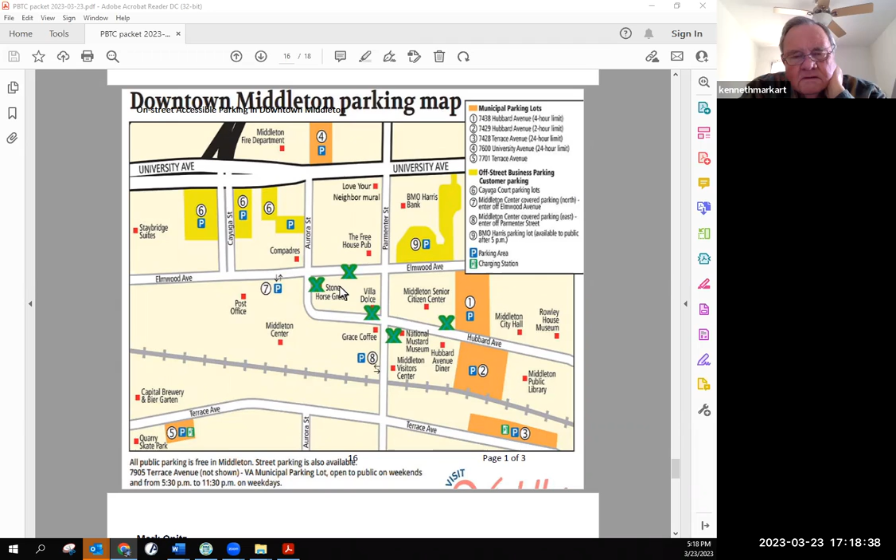Isn't there a couple of angled parking spots in front of the bank there? Right, maybe something could be done there - there's three or four spots. I'm not sure, but it would take two of those spots to do a handicap, wouldn't it? Tammy, you know better. I believe so. I don't know what the dimensions are. Or you could do two spots and have a shared exit area. I'm not sure how it all goes - I haven't had enough time to really look into it.

My personal opinion is it would be better to do it on street, because then you don't have to worry about it being wider. I think you save space and save parking by keeping handicap on street. My concern too is if they have an event where they close down this leg of Hubbard, then those spots wouldn't be available.

May I make a couple remarks? I think I would be remiss if I didn't pass along the comments from the Public Works Director, the city engineer, which I mentioned in the packet. It took me a while to understand this, but I wanted to summarize it.

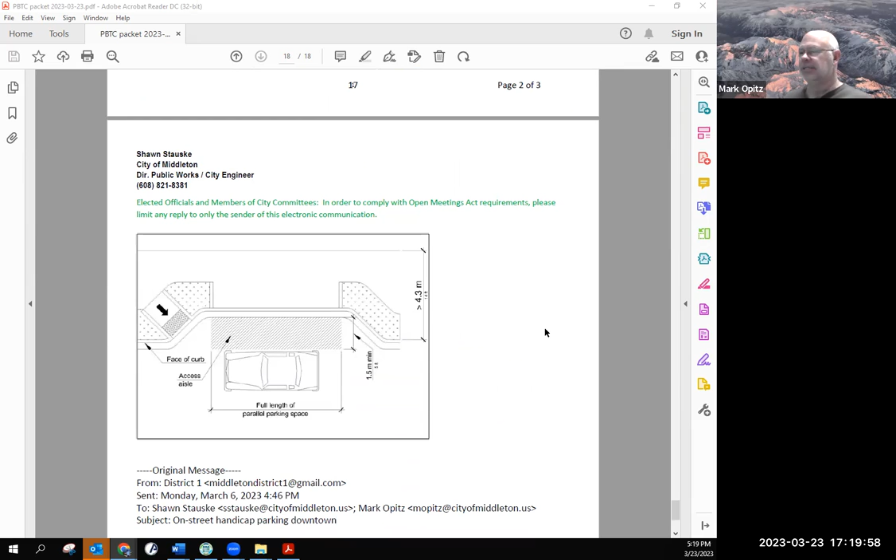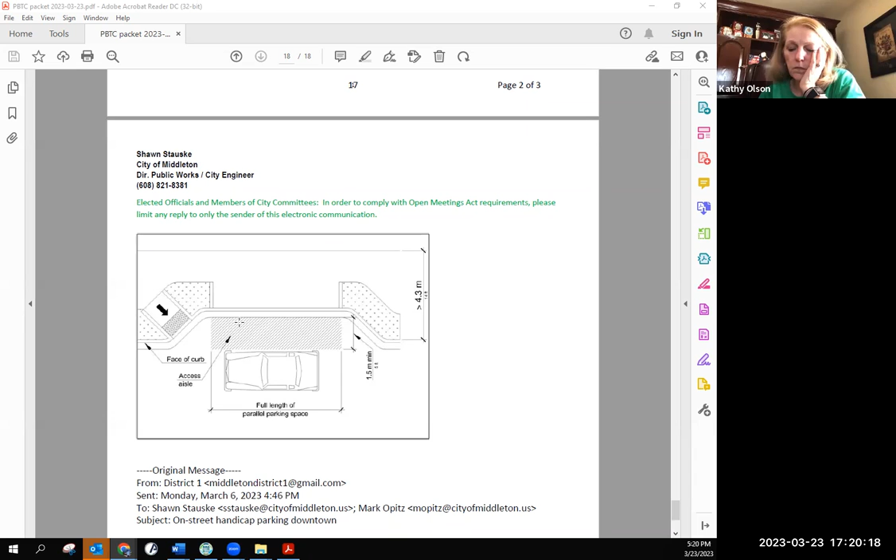In order to have a properly designed handicap spot or accessible spot, there needs to be a level surface on each side of the vehicle. Imagine Costco or Walgreens, or wherever you'd imagine a surface lot, and think about how there's always empty space on each side of the car. The purpose is to provide a level surface in case somebody wishes to access or exit from the driver's side or the passenger side.

This drawing shows that concept on street. The reason it bumps out is because if a vehicle is parked directly next to the curb, there might be 2 inches, might be a foot, however close someone parked to the curb, it creates a gap. So Shawn's observation—I'm not saying he's opposed to this concept, but his concern is simply pointing out that the standards are to have a flat space that doesn't have a big cross slope like you also have on a street terrace.

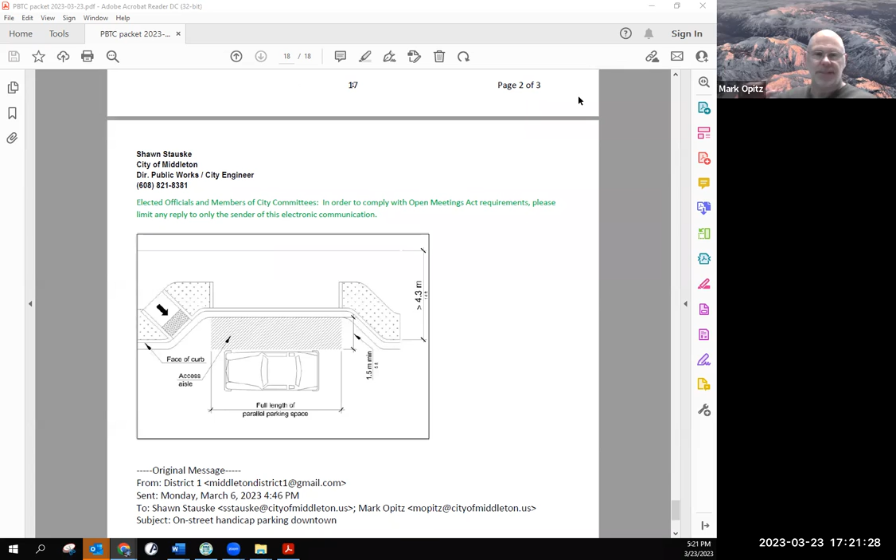That said, there's the phrase, don't let the perfect be the enemy of the good. He and I talked about this because I support adding handicap parking spaces on street downtown. I figure people who need a flat space can make that determination if that's more important to them, as opposed to the many people who can get by with stepping out onto a curb. So I think this has a lot of merit to look at options here that are on the street—they just might not be designatable as fully accessible handicap spaces.

So he and I talked about the idea of a sign, finding some sort of authorized sign that conveys preferential parking for people with limited mobility. Ideally we could use the handicap sign, but maybe somehow conveying—like you see at Walmart or certain places—reserved for seniors, or I've seen them for pregnant women. There's different signs out there, and we could find one that conveys to the public that these are reserved for people with limited mobility.

So I just wanted to pass along the design issues that he cited. There isn't necessarily a standard for this. He just wanted you to be aware of that.

The second observation I want to make is that we have an issue with loading, with truck deliveries that sometimes—Tammy, you've seen this I'm sure with Grape Water and Louisianne's—the vehicles will sometimes park in the street and block a travel lane because they don't have any other way to access the business in close proximity. So I have wondered whether there's a way to have a shared loading zone, available only in the morning until noon or 11, and then have that be shared with accessible parking—finding a way to meet dual purposes.

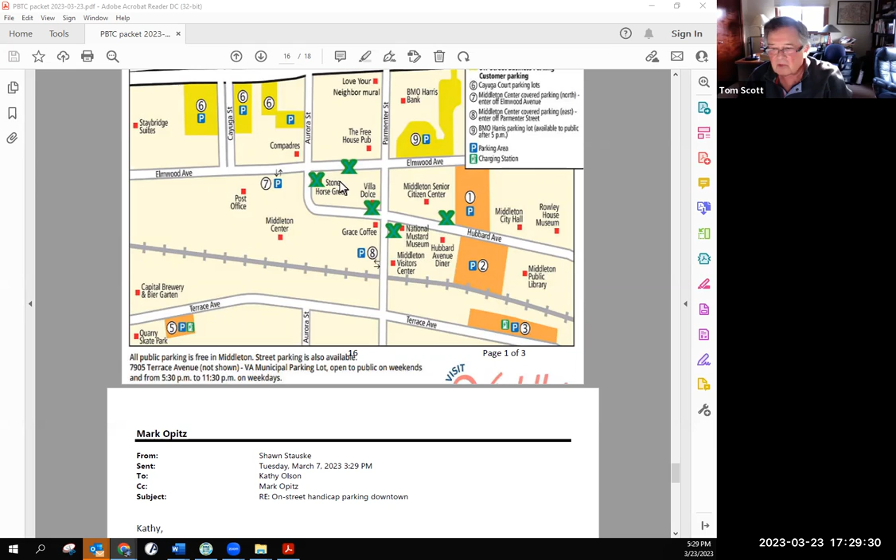I'm looking at Sister Bay right now.

Mark, that's some information you can take to Shawn, and Shawn, you can take a look at that and see what we can do.

Well, if you can think of other examples, let me know. I'm happy to. The nice thing about Google is you don't have to drive somewhere, you can just look at it.

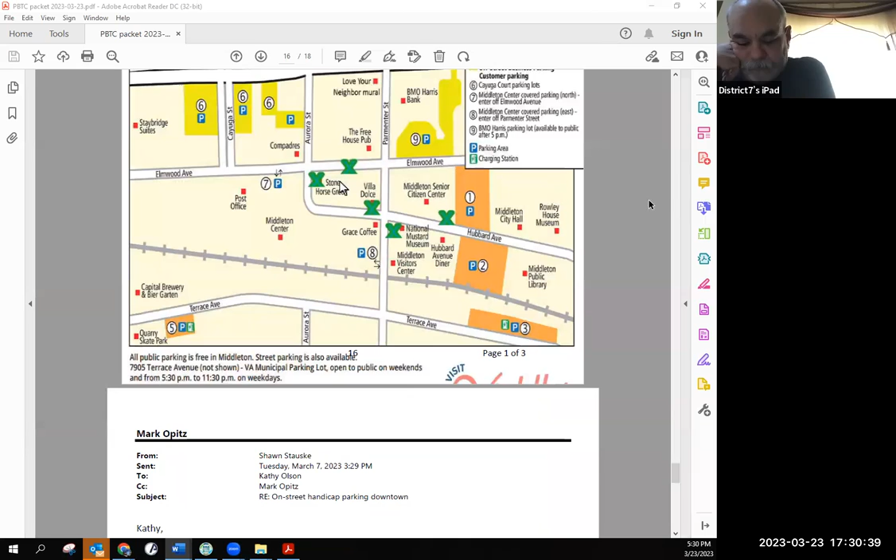So, okay, all right, very good. You need anything more on that, Mark? Or are you good? No, that was a very helpful discussion, and I'm happy to do some research for the next meeting. All right, very good, thank you.

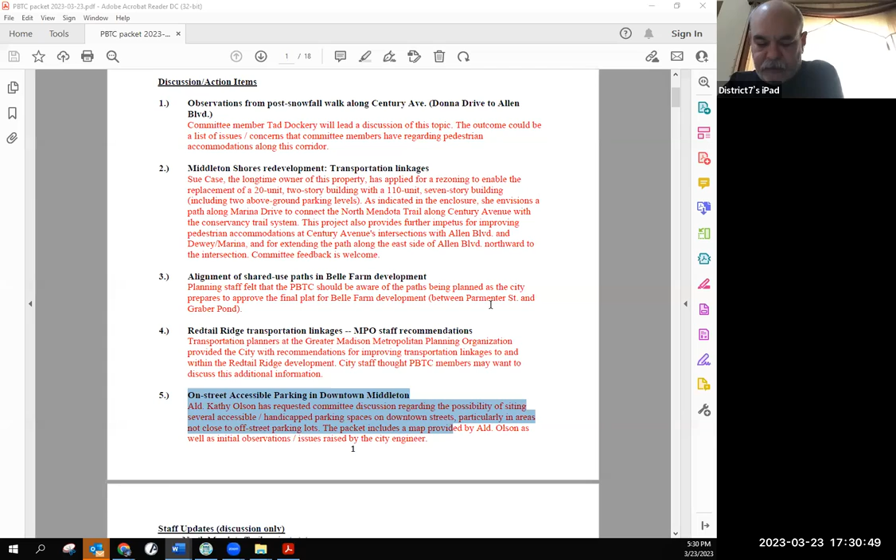All right, let's move on. We'll go to the next agenda item, observations from the post-snowfall walk. Tad, I think this is yours.

Yeah, all right, so let's see, who did we have attending? We had me, Mark, and Katie, and George Zentz was also there. We met at the corner of Century and Donna, right next to the UW Credit Union branch.

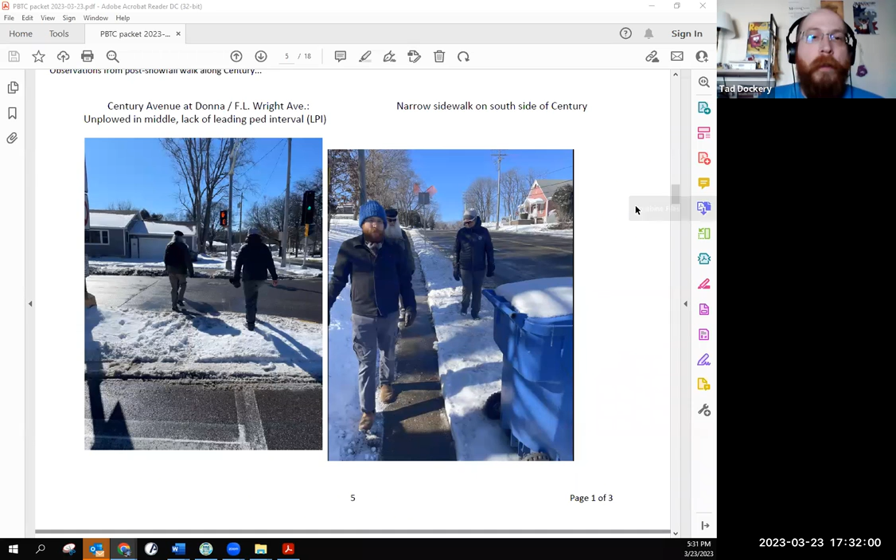Sidewalks are narrow. Shoveling is often only partially done along that particular stretch, or not done at all, leaving it very narrow. You can see the trash cans are still out—that's actually not a big deal, I don't know why I bothered.

Let's scroll down. Well, one comment I do want to make: George noted on the walk that on that side he would not normally walk that direction, because we were walking away from the traffic coming up from behind us. I think this is an interesting observation, but there's a lot of intuitive sense to it, though it's not a luxury residents on the south side of the street have.

Because there are no mid-block crossings, the bus stop in front of the Kwik Trip is partly blocked. It was cleared, but then the plows came by and kicked the snow back up. This is a common feature along the entire length of Century. However, the clearing and the plowing that's done are not coordinated.

The Allen-Century intersection—yes, everyone's favorite intersection. There's standing water in the ramps. This was hardly unique to this intersection, but it's especially prominent there. The markings are faded, and it's a three-stage crossing that takes a very long time.

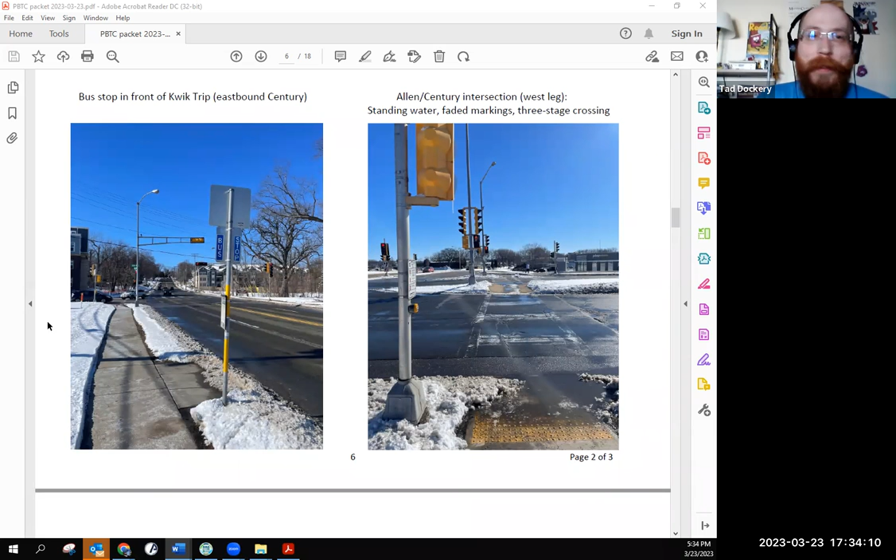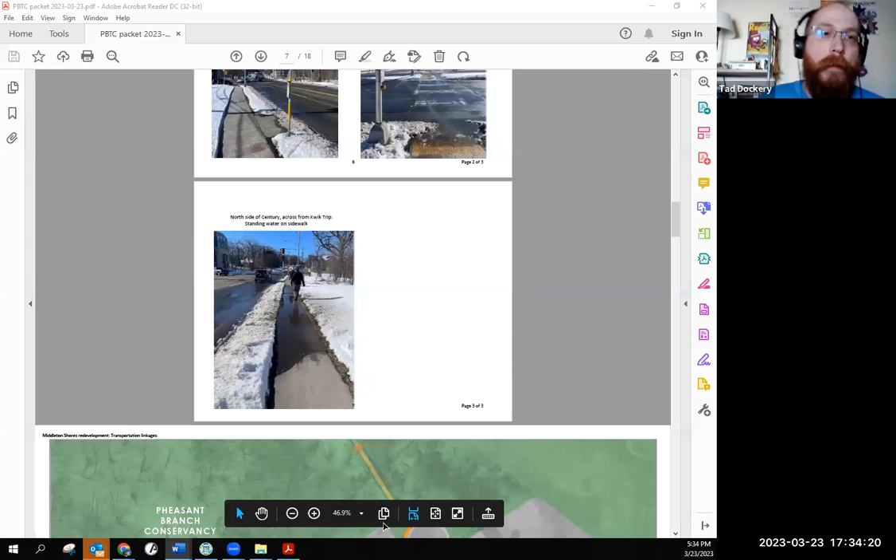Keep scrolling. Once we reached that intersection and crossed the street, we headed back north, heading west again on the north side of the street. This is across from the Kwik Trip—you'll notice the standing water on the sidewalk. This is a feature of winter because snow piles up on the terrace and lawns, and all the meltwater in flat or dipped areas just collects there.

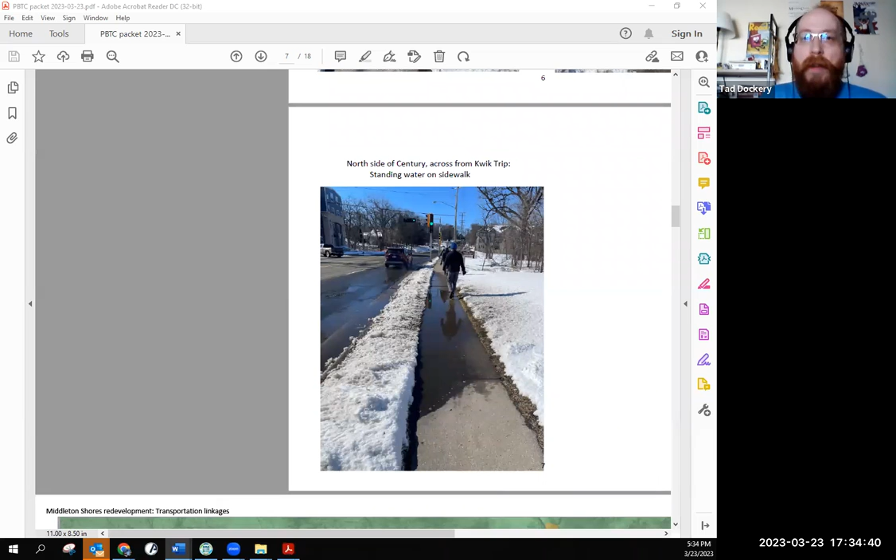Back up closer to where we began, where that narrow sidewalk is, that stretch is actually particularly treacherous because of this effect. The water will melt, run down during the day, and then freeze at night, so you have sheets of ice on a sloped sidewalk. That's just that one little stretch of Century after a snowfall.

Other questions? Comments? Did you mention the LPI at Frank Lloyd Wright, the delayed time? No, I didn't, that's correct. When we pressed the button to cross the street at Century, we were the only people there. We pressed the button, and a car arrived several seconds after and got the green arrow ahead of us. This is the thing I have been complaining about for a year and a half now.

Yep, and we did also test the LPI down at the crossing of Century for the Conservancy, just to see it in action. And we noted the significant difference.

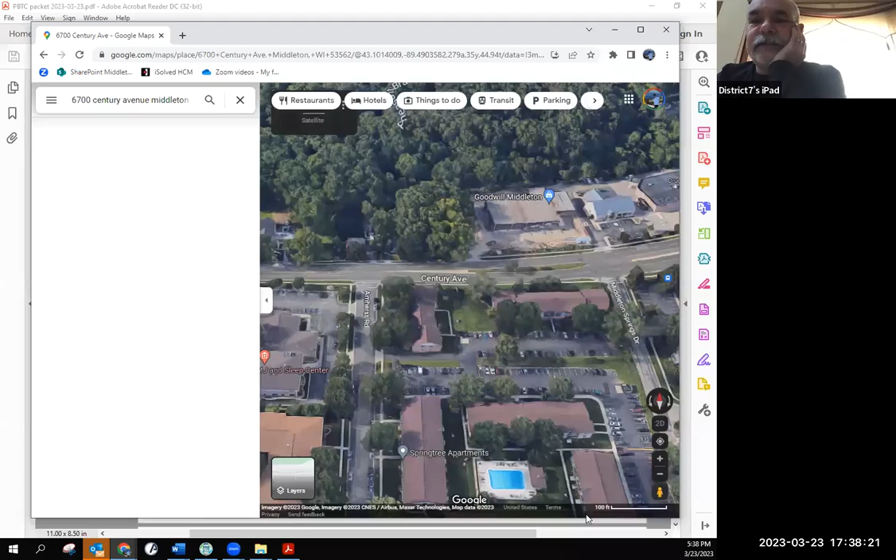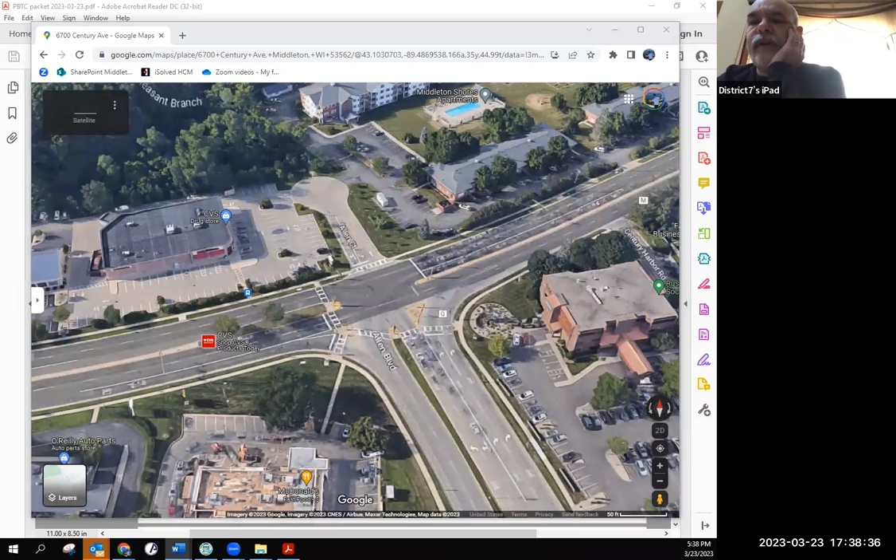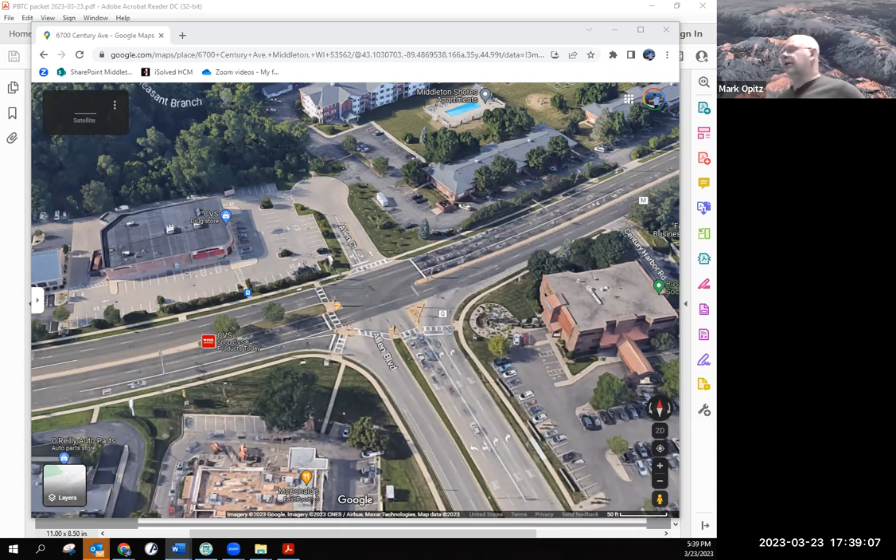One of the things this committee is going to become more involved in - Mark and Sean Elsrud are going to be working together on this - is getting more involved with the 5-year streets plan. In our last 5-year streets plan that the Public Works Committee just looked at a week or two ago, we looked at, Mark, was it 2026? The county was looking at resurfacing Century Avenue, and as part of that, the Public Works Committee put forward a motion to put some money in the 2025 budget to redesign the intersection at Century and Allen, because as we've all discussed, it's a terrible intersection. So the opportunity to do something with that, and for this committee to have input, is coming down the pike - we'll have much more say in what's going on.

And some of the things you showed in your pictures, Tad, I'm just not sure there's really anything that can be done. It's the nature of where we live - I don't know how you tackle standing water or freezing and refreezing. Some of those things are just the nature of where we live.

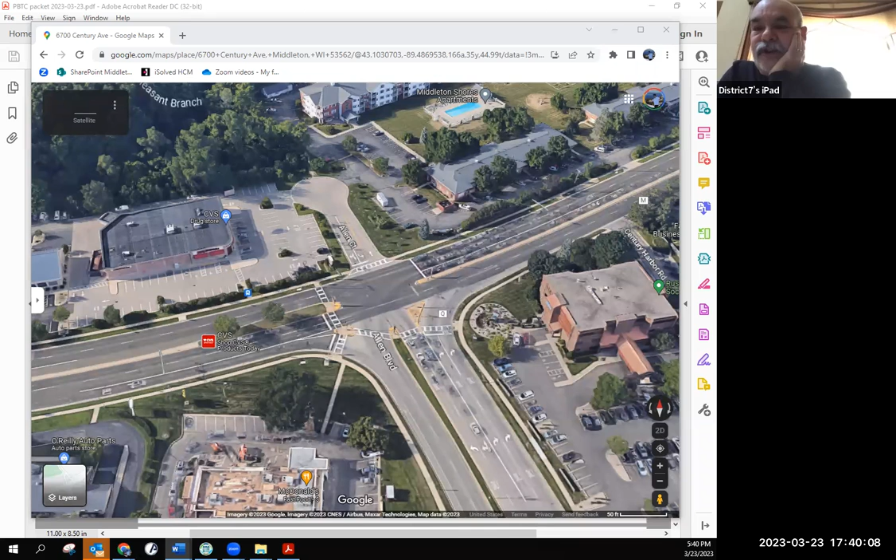Yeah, some of it - a big part of it along here is narrow sidewalks. The sidewalks are only 3 feet wide as designed, and due to lawn encroachment, they're frequently narrower even in summer. That means snow collects very close. Where we were walking on that narrow sidewalk, it was that narrow because the people there do not shovel the entire sidewalk. Nobody ever complains to the city, so it never gets done.

I have now used the snow complaint system on the website exactly once. It's a pretty frustrating system to use - I have to log in, find the form, and because of that, I'm not going to do it. I'm not going to take my gloves off and log into the system on my smartphone out on the street and stand there filling out the form. So I have to remember to do it when I get home. A lot of people don't care because they drive everywhere, so it doesn't bother them.

So the narrowness of the sidewalk plays a huge role, because I also walk through part of the Parkside Heights neighborhood along Donna Drive. When I'm walking along Donna Drive and then south to University during the winter, I walk on the sidewalks only as far as Meadowbrook, then I dodge off to Meadowbrook and Brookdale to cut the corner. Those places do not have any sidewalks, just a street. As a result, the street gets plowed, it's nice and flat, dry and easy to walk on, and there's almost never any cars.

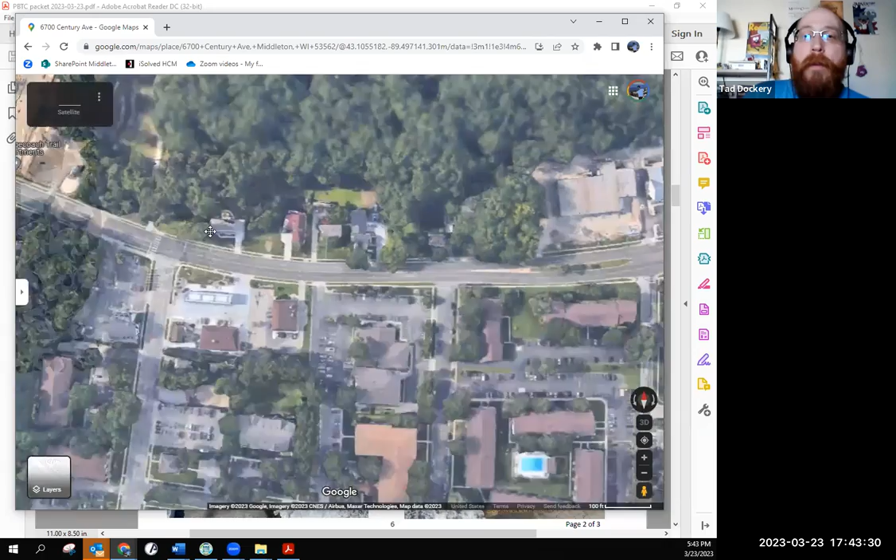Likewise, another big place that the water pools is at the curbs. So when we crossed Amherst Road, there was a significant amount of water pooled in the curb cuts, but Amherst Road is completely flat. The reason the water pooled there instead of draining away is partly because of the snow, but mostly because the curbs are designed in such a way that the snowplows push these snow dams right up into the gutter. The water pools into the gutter, so there's no water standing on the crosswalk, only on the entries.

One of the reasons I brought up continuous sidewalks way back when we were talking about Elmwood and Park is because continuous sidewalks drain the water off into the street, creating a drier walking environment. Now we'd have to figure out what that means for snowplows. I know the UW manages to do it at several locations, so I know it's doable.

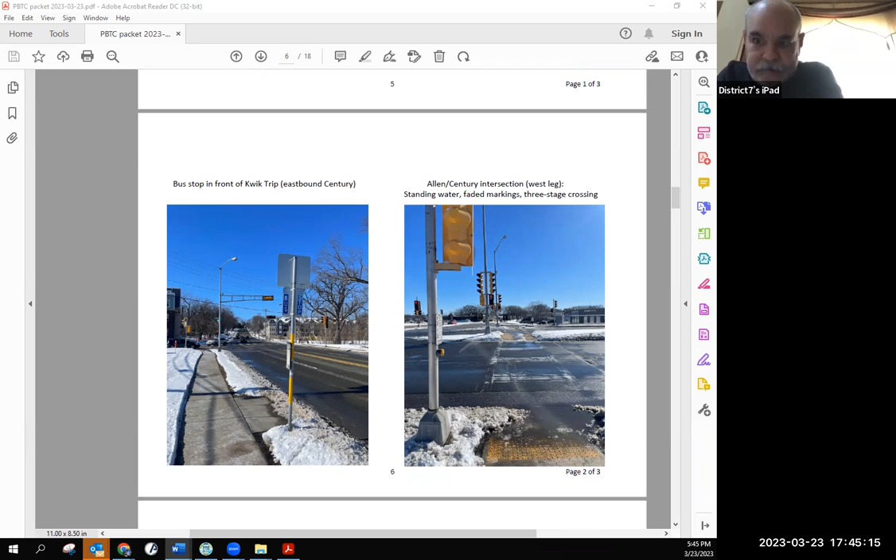Sorry, I could ramble on, but no. Well, and again, I understand some of the issues you're talking about. I also know from a practical standpoint that these issues are most generally dealt with when we redo a street. We're going to have an opportunity to weigh in and have some input on what Century and Allen is going to look like.

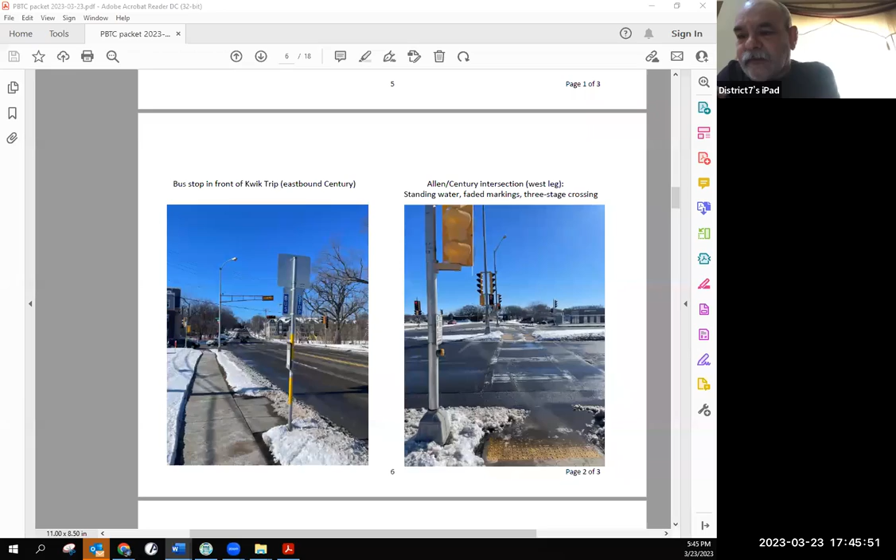And kind of that entire length to a certain extent. We're redoing Century, but we're not going to tear out all the sidewalks and start over. That's just not in anybody's budget, not in any world. But incrementally, we can at least change some things. It's all got to be in from a financial standpoint, and that's just the way of the world. It's got to be done in conjunction with another project.

It's good to be talking about it now, because otherwise we'll continue doing the same things we've always done. Which is why it's very important that this committee - and it's only been within the last year that this committee will take a more active role - I pushed for a more active role in the 5-year street plan, so Bike and Ped will actually have more input into making some of these changes and helping it become more pedestrian safe.

So, while we're not going to solve all the problems, there is opportunity for us to start having some actual input into some of these solutions of these problems you're talking about, which I think is a good thing. So we'll count on you, Tad, to kind of push the envelope a little bit as you do. So you're our resident envelope pusher.

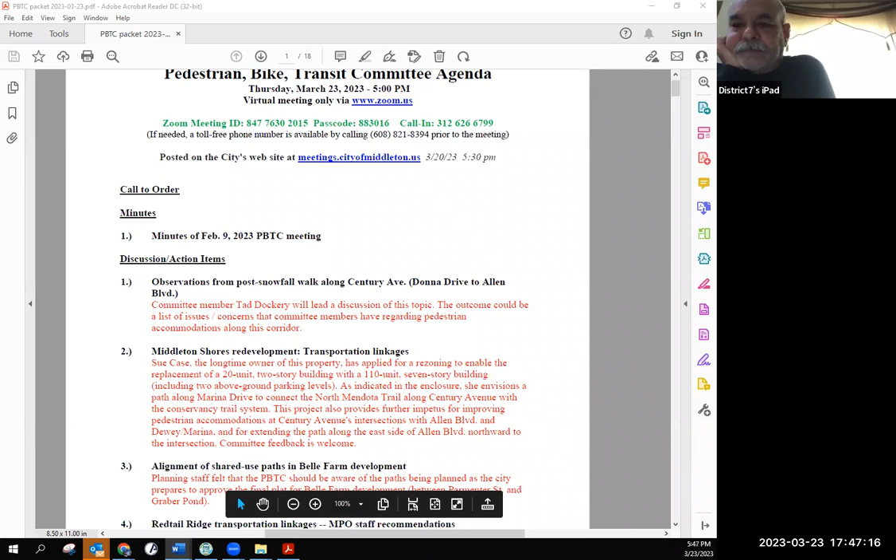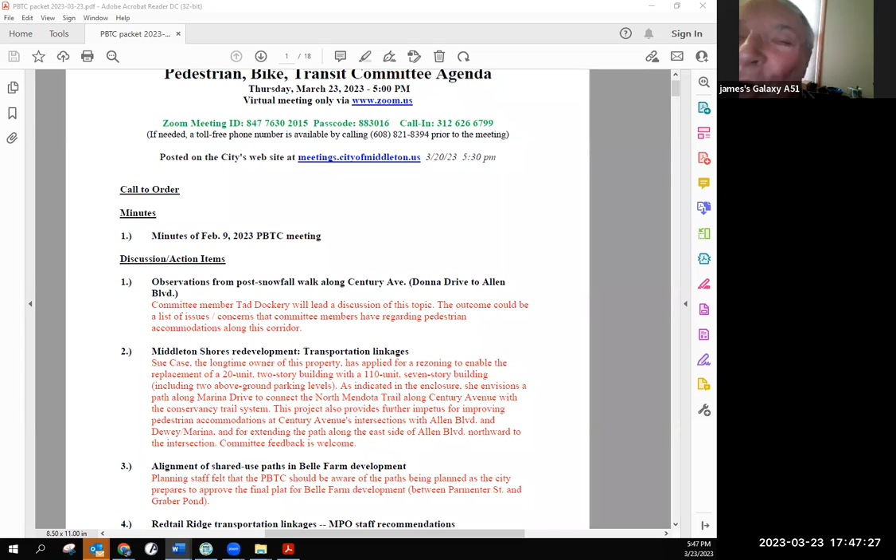All right, does anybody have any comments to Tad's presentation? I wanted to bring up one thing - this is Jim. Yep, thanks Jim, go ahead. Sorry, my computer got hacked and I'm speaking on the phone.

As far as the mid-street refuge, who's responsible for clearing those? Because I'm very familiar with the one on North Avenue and Park Lawn, and you can be a week and a half after a snowstorm, and you go across the street, you have to go around that because it still has snow on there and never gets cleared. So I'm just wondering, because oftentimes on the committee we will mention those as a benefit to pedestrians, and I definitely think they are, 8 months out of the year. But just wondering who is responsible for clearing that?

I would say the answer to that is us, because it's within the right of way. We expect homeowners who live on corners to clear the ramps, but I'm not aware of any homeowner that then goes into the street where we have these pedestrian refuge islands. I didn't even have to go to that one you referred to, because we had one in the packet, as Tad noted - so that's a very good point. I'll pass that along to our public works staff as a reminder for next year to make sure we take care of that. Given that the focus is on plowing, sometimes when plows do a second pass, they come back up and cover what people have removed. Few people want to do something twice.

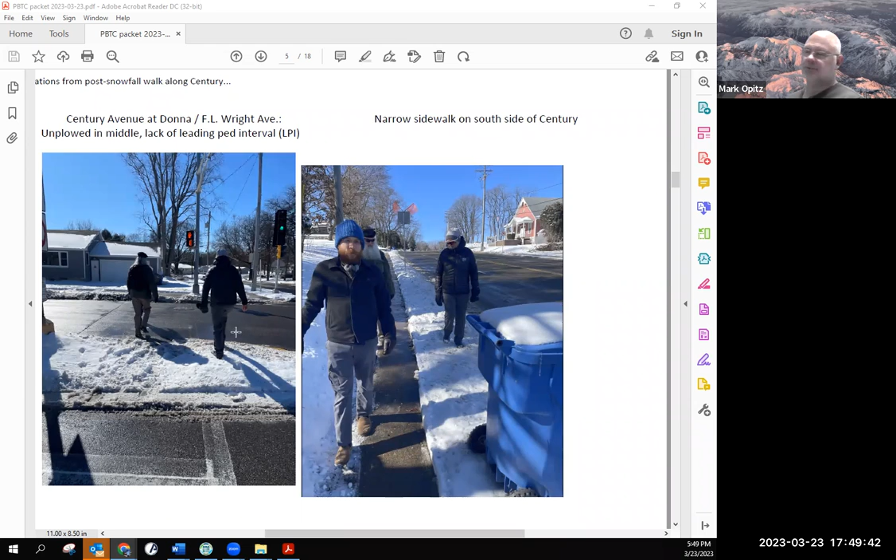But it doesn't mean the city doesn't do bus stop clearing. This should have been taken care of, although was this like a day... when did it snow here, Tad? I couldn't remember, it had snowed the day before?

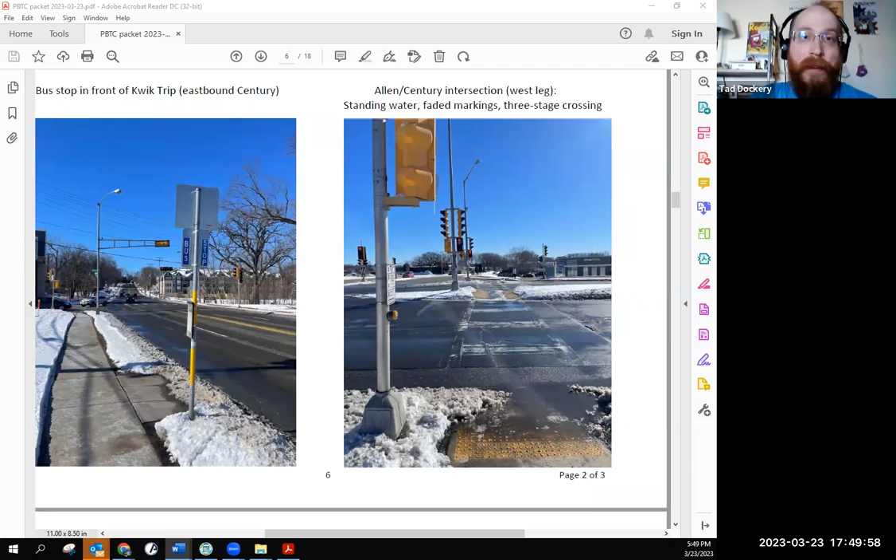Yeah, it had snowed the day before. Well, right, and in that case it had clearly been cleared, and then just slush had been kicked up. It wasn't a big snowfall, and actually that made it easier to walk, because it had melted enough and was warm enough.

As you can see, this was on February 17th, I think. I guess I didn't put a date on there, but it was mid-February. So the conditions here were better than they often are after a snowfall. This is a fairly minor accumulation, but it still is an accumulation that could impede a wheelchair.

So these are things that the public works staff will come back and address after they're done plowing, but there's only so many staff, and the prioritization is to get the roads cleared.

We also have problems at intersections where plows come by and it's hard for them to make a tight corner. I used to live on a corner, and there was probably, not exaggerating, at least 5 feet of snow from the curb out into the street where the streets intersected, where it was squared off where the plows went, but that sweeping curve had snow in it, and that was like that for days.

So it depends how much snow and how busy the crews are, but obviously some of the details for pedestrians are not prioritized as much.

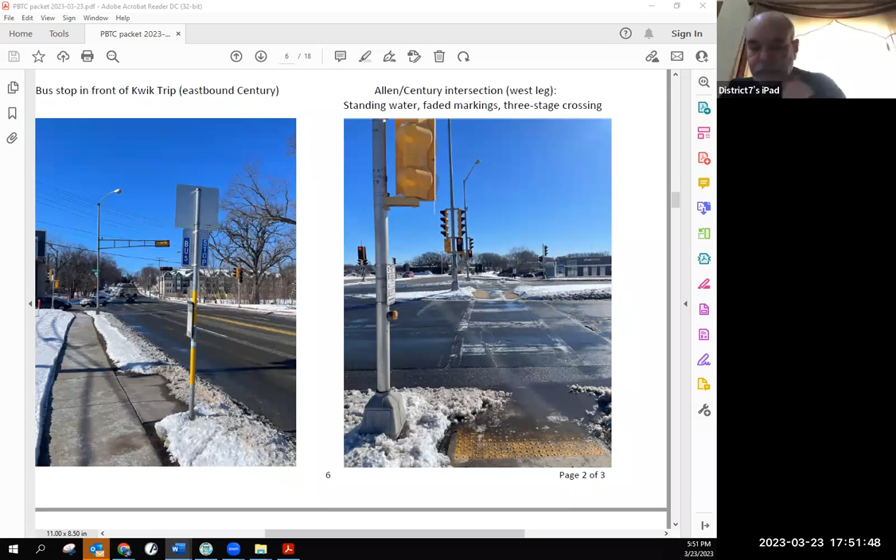Let's move on to agenda item number 2, Middleton Shores Development, Transportation Linkages.

This is here because this is a development concept that's on the agenda for next week's Plan Commission meeting. And I wanted you all to be aware of it because it includes some pedestrian bicycle features that I just want you to be aware of.

They envision, as part of this project, it's a 2-phase project, they would like to run a path along Marina Drive. Let me go back over there now. So Marina Drive is this street to the east.

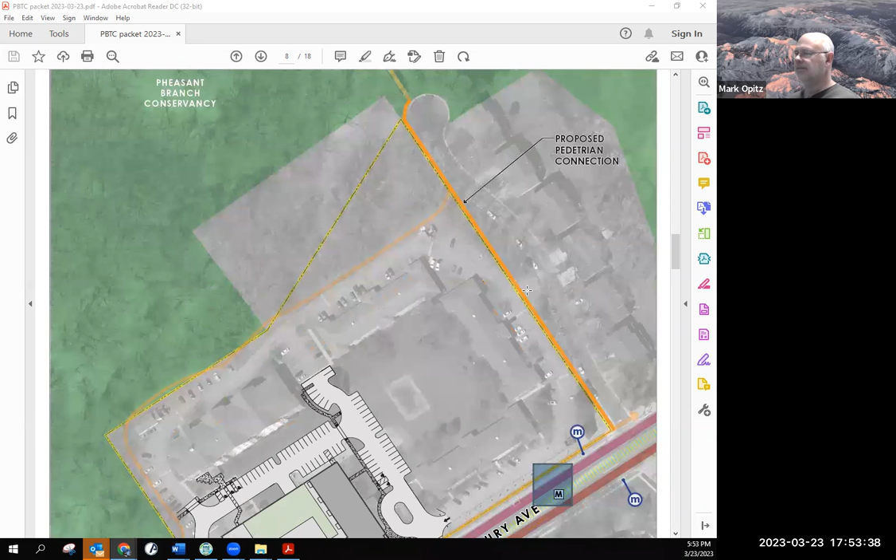So what the property owner here would like to do is work with the city. This is right of way that the city owns, and extend the path along Marina towards the Conservancy. That's, I think, a really exciting addition, when that happens, to our trail network.

But then the biggest issue is the intersection of Century and Allen. As we all know, and as we just discussed, it's one of the most hostile intersections in the city for pedestrian activity. Multi-stage crossing, three crosswalks to go south and three to go east-west. Actually four, technically, it is four.

So if you were leaving McDonald's with a Shamrock Shake, you'd have to cross here. This is the 2nd, this is the 3rd, and here's the 4th crossing to get to Harbor Athletic Club to work off the shake. Just to use that as an example.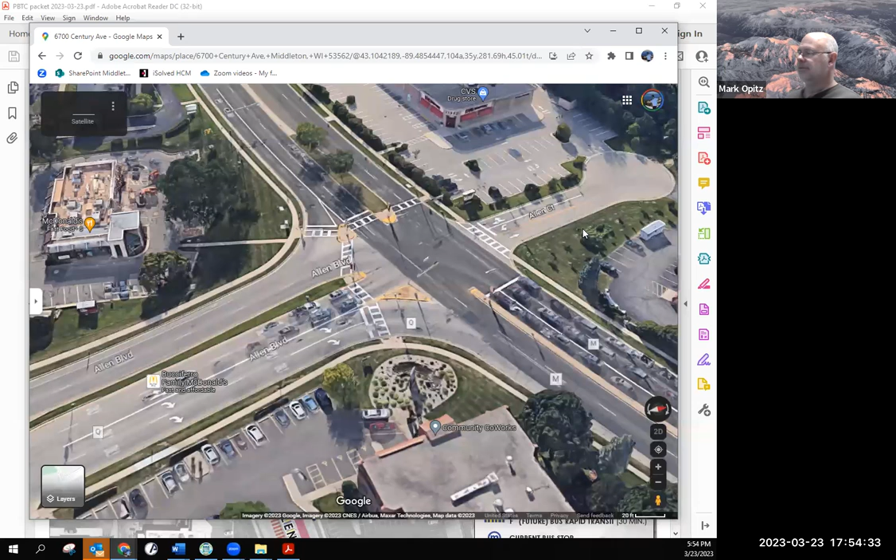And that's more that I'm saying for my own benefit, because that's really what I should do when I have one of those. So this intersection, as Dan noted, needs to be reimagined, redesigned, regardless of the development. It's an issue today.

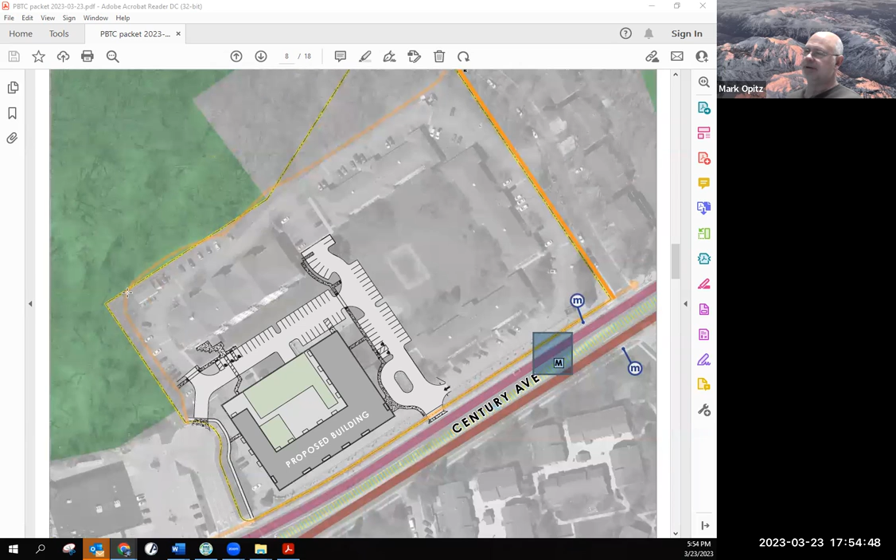So that's all I had to report, Dan, was just to point out. Oh, actually, the other thing I was going to mention is there is a path that was put around the west and north sides of Middleton Shores. Penny Klein, our former public lands manager, did that 10+ years ago. It has not been maintained or kept up. There's been some erosion, it's in many places overgrown.

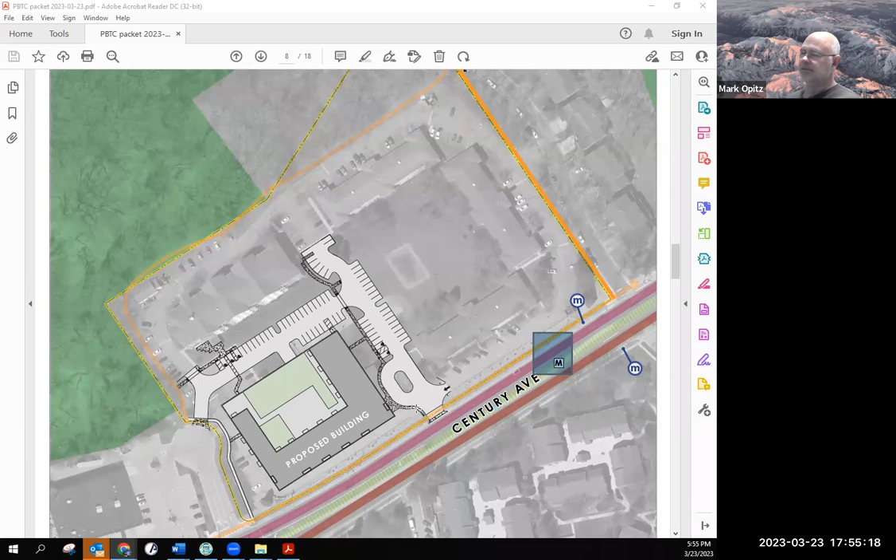So that's why this is shown here. If this path goes in along Marina Drive, I think that provides a better connection anyway, but that's the other pedestrian feature here. They also plan to have internal circulation through their property, with sidewalks shown in the detailed drawings. That's very appropriate.

So that's what I have. Mark, have they indicated any kind of timeline? What's going to the Plan Commission next Tuesday is a public hearing on the rezoning application and the related conditional use permit.

If the city is inclined to approve the project, they envision breaking ground in spring of 2025. And then they have a second phase eventually, now targeted around 2029. That's the eastern part of the property, which they plan to redevelop with something similar, but that's conceptual at this point.

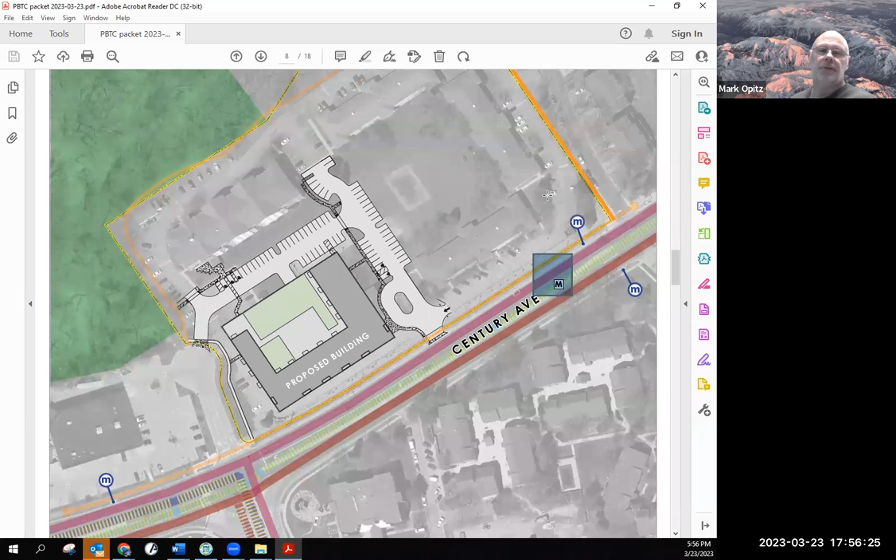They are meeting with neighbors — I attended one of those neighborhood meetings this afternoon. So they are working with neighbors to discuss the project. We did receive public comment from someone on the call, Kierstin Kloeckner, which I provided to you this morning.

So if they're looking at breaking ground in '25, construction wouldn't be done till '26. Potentially Century Avenue would also be done in '26, so there could be some time to help alleviate some of these concerns.

Since this is just a conditional use and a rezoning, I understand there's going to be concerns about density, traffic, and pedestrian and bike safety. I would encourage anyone with concerns who wishes to make a public comment to come to the Plan Commission public hearings. We're hybrid, so you can do it online — you don't have to be in person, although the committee does meet in person.

That's on next week's agenda, Mark? Yeah, 7 p.m. We just posted the meeting packet an hour ago. The developers' submittal of their site plan and building elevations are in that packet on the city's website under meetings, committee meetings, Plan Commission meetings. You'll find that information — the hearing's at 7 p.m., right at the beginning of the meeting.

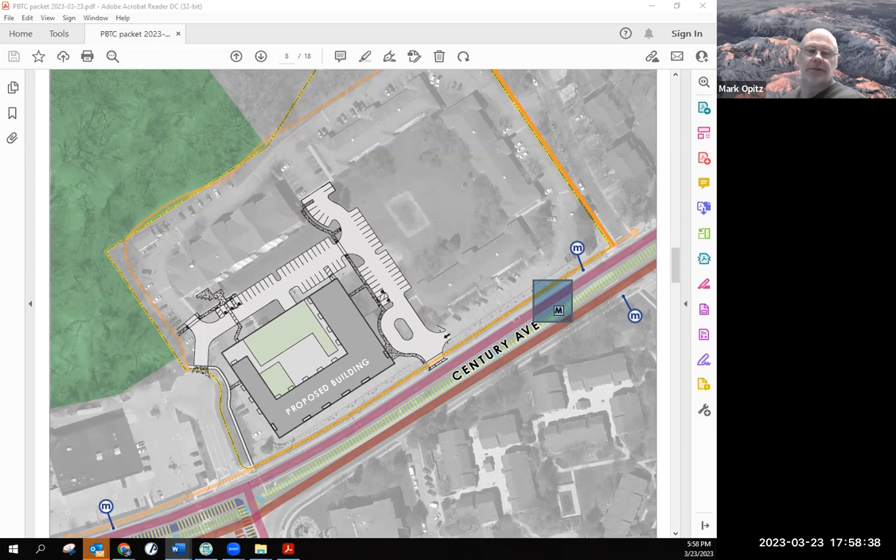So for all those with concerns who would like to speak and ask questions, I'd encourage you to come Tuesday at 7 o'clock. I'll add that we're recommending at the staff level that the commission not take action that night, and just postpone discussion, since there'll likely be a number of public comments, and we're also requesting additional information from the development team.

Okay. Very good, thank you Mark. Are there any other questions or comments on this item?

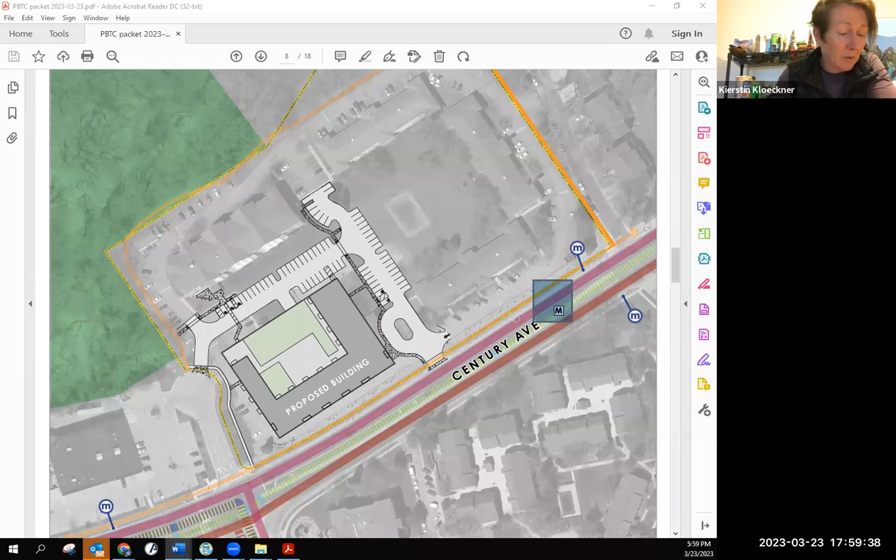Kierstin, do you have a quick comment? Yes. I brought it up a few years ago about possibly having an RRFB at Tomahawk or Marina. That could be part of this development, especially at Marina. The only reason I'm bringing this up is that it's not necessarily for the developer, but for the city. Crossing at Allen and Century is going to get much worse with this development, and like Tad mentioned, most people choose to cross not at the corners but mid-block. I'd really like it revisited to have the crossing at Marina or Tomahawk with an RRFB.

Very good, thank you for your comment. That's something this committee has asked on a couple of different occasions to be part of any work done on Century Avenue, so we'll move forward with that. But thank you for your comment.

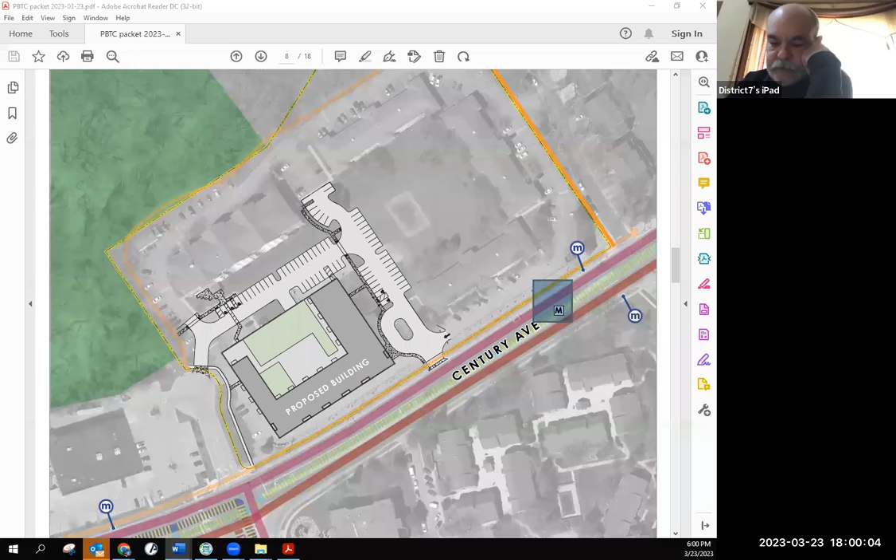Anyone else? All right, then we will move to — let's see, what are we on? We are on the alignment of shared use paths and the Bell Farm development.

I went back and looked through our records of meetings, and I could not find that the Ped Bike Transit Committee had ever weighed in on the Bell Farm development. I was surprised by that, and I apologize if I missed it. Obviously, through the Plan Commission, we've discussed the path that's going to connect. Let me get to the agenda item here.

Here it is. So I made this drawing to indicate the path, just for context. Let me show you where this is. Let's make north up.

So this is over northwest of Graber Pond. Parmenter Street is here on the left, our Middleton Operations Center at the upper left, Graber Pond. And this is Bellefontaine Boulevard, which is envisioned to connect with Schneider Road.

I think you have weighed in on this in terms of the design of the road in the past. But what I want to bring to your attention is now as the preliminary plat becomes the final plat, this is what the development team is proposing. This is my drawing on top of a map that they provided, but I wanted to create this color drawing to show the linkages, or the network of the trail system that's being planned.

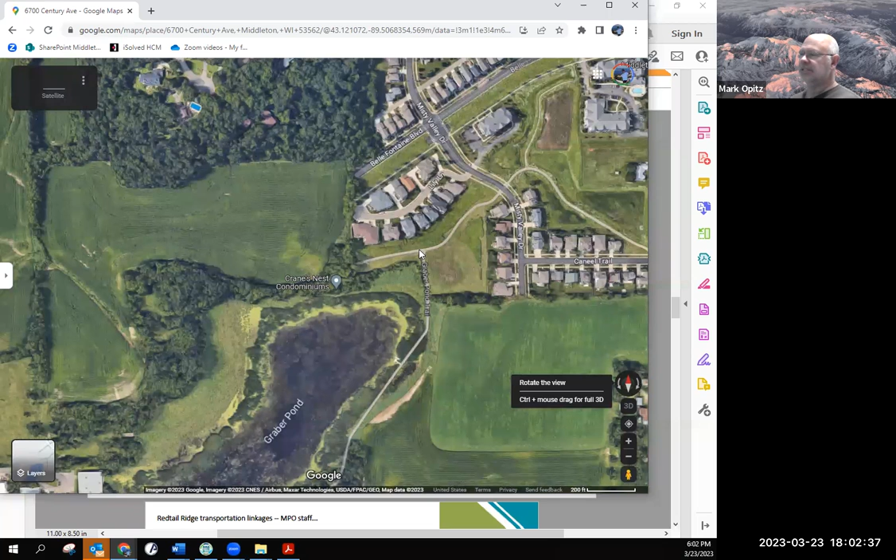We'll have the path on the east side of Parmenter Street. And then we have the existing trail system through the Misty Valley, Middleton Ridge subdivision that ends right at this development site. This green connection here is intended to continue that path. There will be a short 150-foot stretch that's not connected, that requires on-street travel, which is a disappointment to me. I've advocated a different solution, but this is as far as we've gotten.

And then we are also planning a path along the length of Bellefontaine Boulevard. You've seen that with the Redtail Ridge subdivision. So that is an exciting addition to the north side of Middleton as Bellefontaine develops. There'll be an off-road path along the length of Bellefontaine Boulevard. So I just wanted to run this by you, make you aware of this, see if you had any comments that we would incorporate into future Plan Commission review.

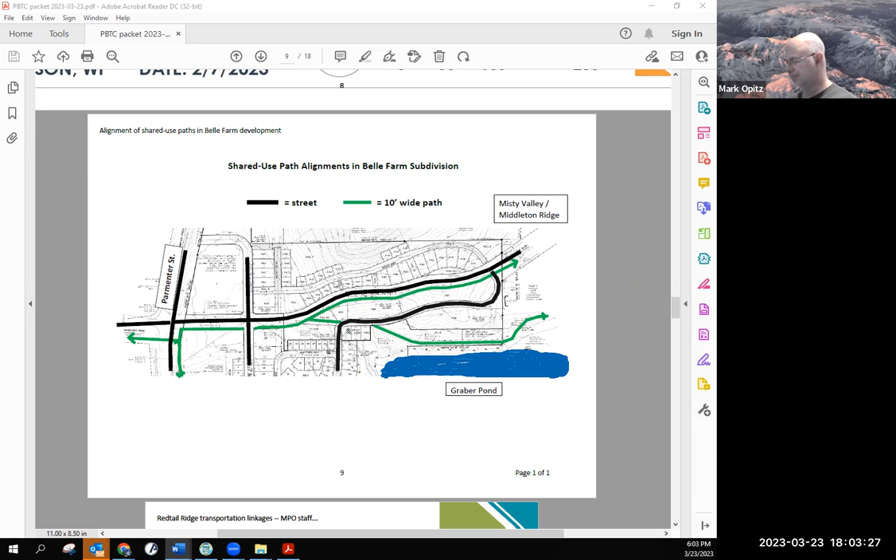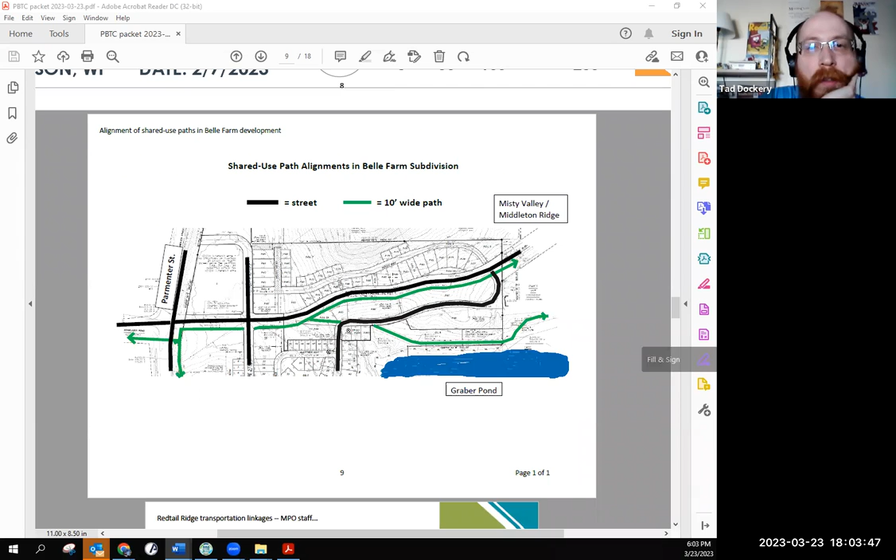Does anybody have any comments or questions for Mark? Are we gonna make the eastbound direction following Bellefontaine take over the southern alignment of Bellefontaine?

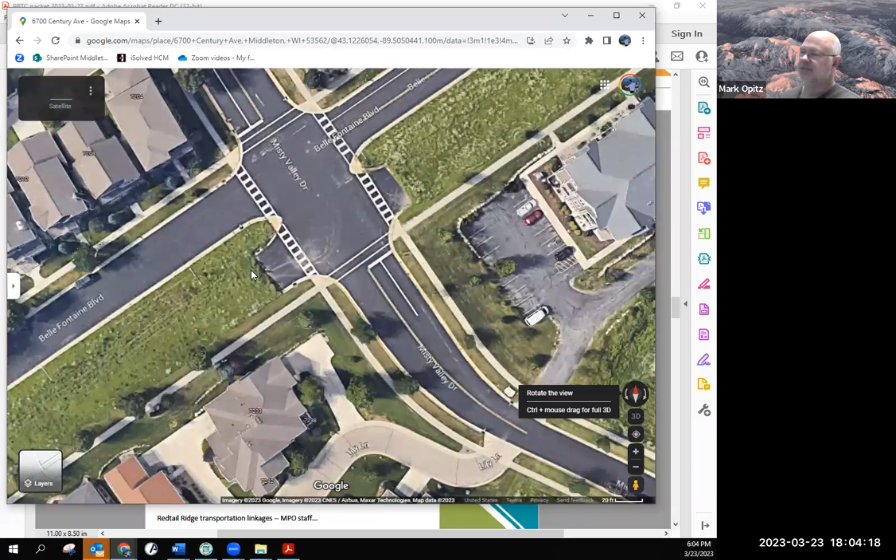Because that'd be awesome. Yes, so what you're referring to, Tad, is this. We designed Bellefontaine Boulevard years ago, 10 years ago. This was intended or envisioned to be a future 4-lane road with a boulevard, that's why it's called a boulevard. And so the sidewalk was placed along the edge of the right-of-way, and you can even see where the road was intended to be, where the additional lanes, the future eastbound lanes, were intended to be.

We have since, in the last year or so, decided that we don't need a 4-lane on the north side like this, so we are going with a 2-lane design. So this can and should be replaced with a path, a 10-foot wide path. But as this gets carried forward to the west and to the east, the right-of-way won't be as wide because we've decided not to go with 4 lanes. So this will be essentially a linear park through this development. And then to the east at Redtail, once it crosses High Road, it'll be a narrower, more traditional cross section. You've seen that cross section before.

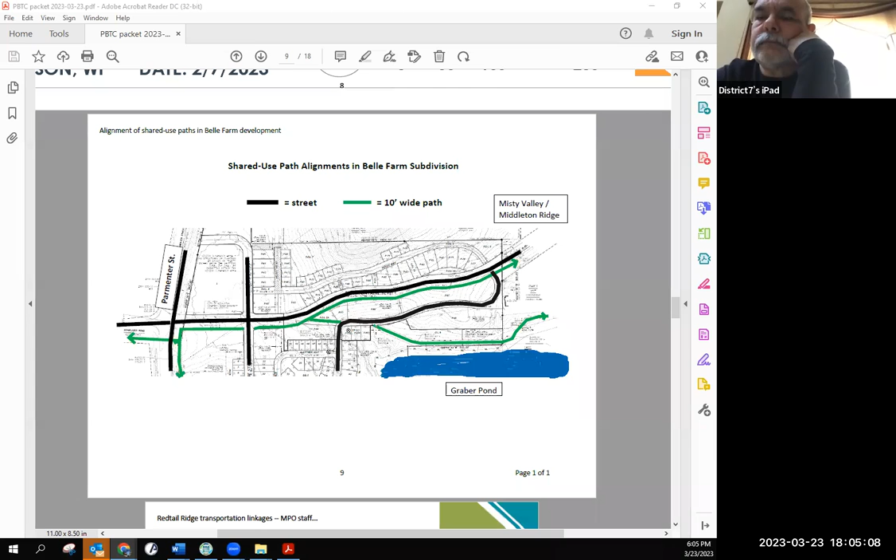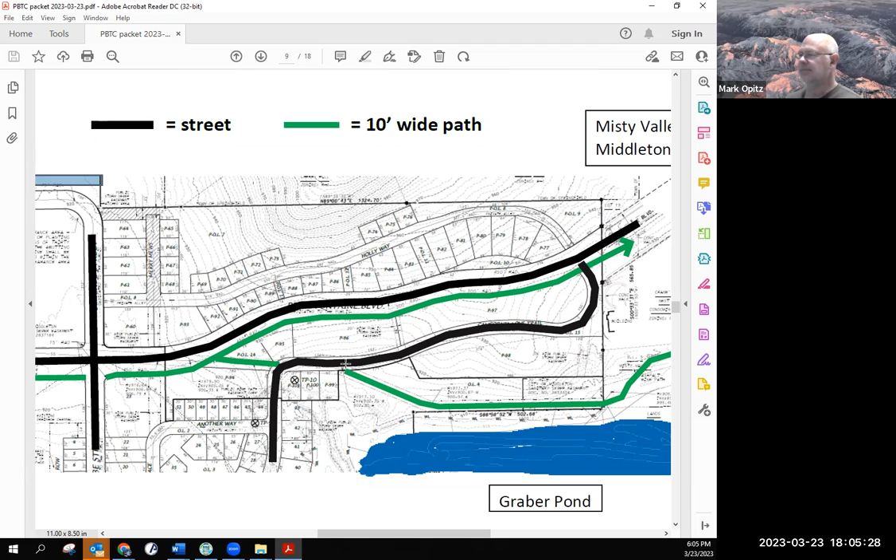So I guess my main question is, how do you feel about this gap, this section of path. This is going to be a relatively lightly traveled part of the road. The black was just intended to convey pavement. The roadway here is not going to have as much traffic as Bellefontaine itself, but I'm just wondering what your reaction is to this. There's three lots, three houses that will front this road here.

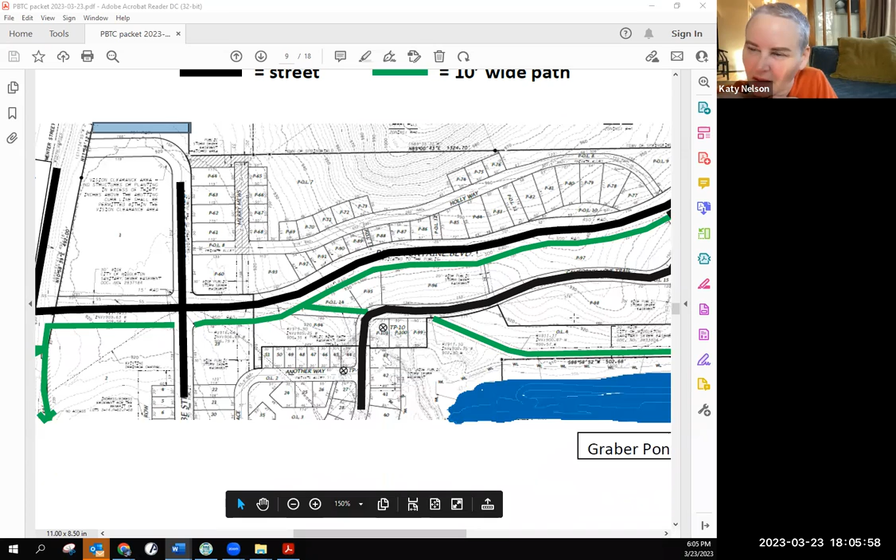Any comments? Well, this is Katy — I would have been more concerned, only you just said this is not a very high traffic area. Will there be a bike path on that section?

I don't know that they're at that detail, you know, if there would be a bike lane when you enter the street. Bike lane, I mean, I'm sorry. Bike lane, yeah, no, I understood what you meant. I don't know how that will be, that's why I'm bringing this up to you. I guess I look at this as it'd be nice to continue the path and just have to cross at a crosswalk, although this is at a sharp curve, a 90-degree curve.

But you know, that can be done. This is a 2-way road, and then have the path in the front yards. That would be one way to carry that path forward.

Because otherwise, what will happen is with 2-way car traffic and 2-way bike traffic, my guess is westbound bicyclists will gravitate into the proper lane to go west, and eastbound likewise. There are examples in Madison where the path runs through the isthmus, where for a few blocks you have to take the street, and people bike on the right side, and those are generally low volume vehicle routes.

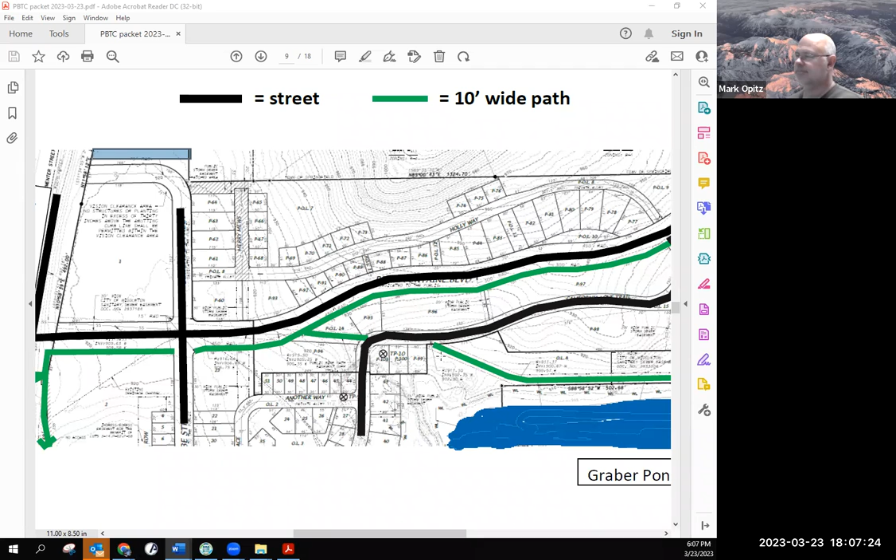My main goal, what I've been trying to nudge the developer toward, is to accommodate the path the entire length, instead of just using the street at this point. It seems like the right time to do it.

What was the developer's rationale for not doing that? Can you refresh our memory? There was some issue, I don't remember what it was though.

Well, Dan, when you saw this last, they were trying to get the path connection up here on the east side. That was their intent. They weren't even going to put this part along the pond.

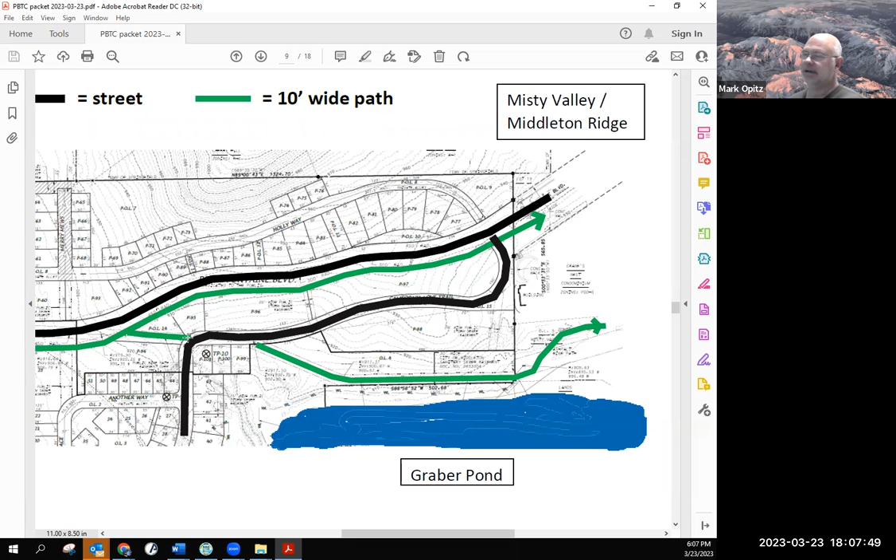I actually always recommended this alignment because it brings people to the pond. You come down the hill, it's very hard to see the contours here, but there's some topography, a change in grade. This will drop down towards the pond. So I just felt that this was a way to get people access to the pond.

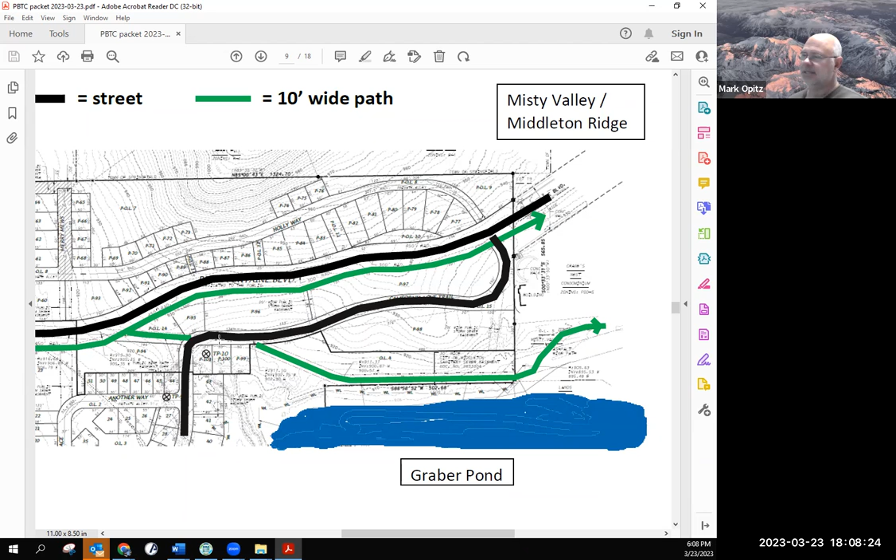So initially I think they just wanted to maximize the developable area. They also pointed out that they have a path already, an east-west path along Bellefontaine. But now that the path is coming this way and they basically have parallel paths, how important is it to have this gap filled in?

We don't have an on-street linkage like this anywhere else in our trail system that I can think of. And I'm just worried that, I just feel like let's go for the ideal solution now while it's under development, before it's developed.

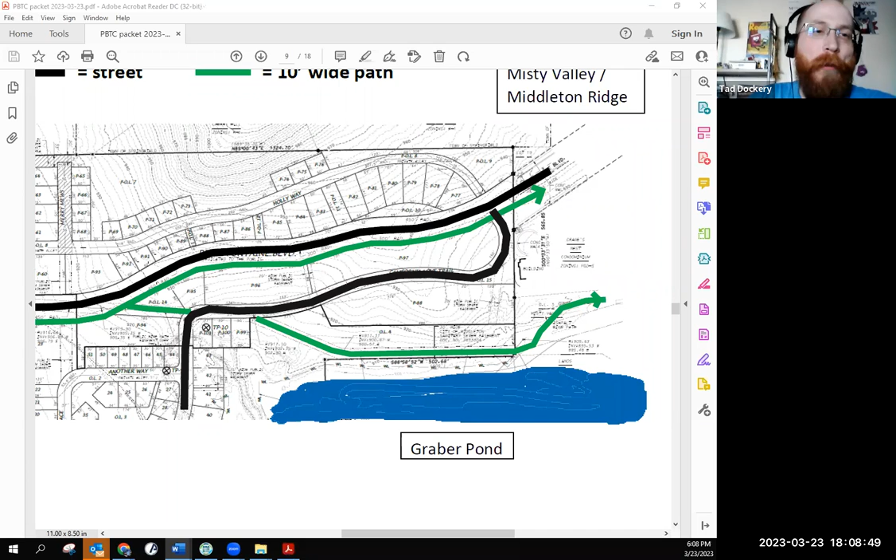I totally agree. I agree as well. And the angle on the east side really bothers me, where a westbound cyclist is going to have to turn all the way around to check for cars coming up behind them because they're merging in at a sharp and very strange angle.

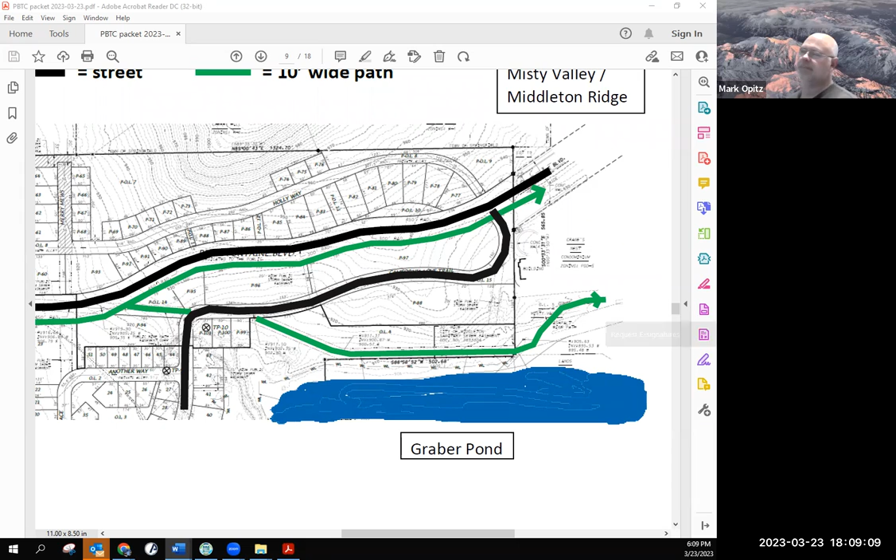Well, keep in mind, this is meant to be conceptual. It's not actually designed. Yes, but I understand, but you're gonna have to do something.

And like you said, it seems weird to not just continue it in front of the houses and then cross at right angles at that curve. And maybe that is the intent.

They should, or maybe you should draw better. Someone should draw better. Sorry.

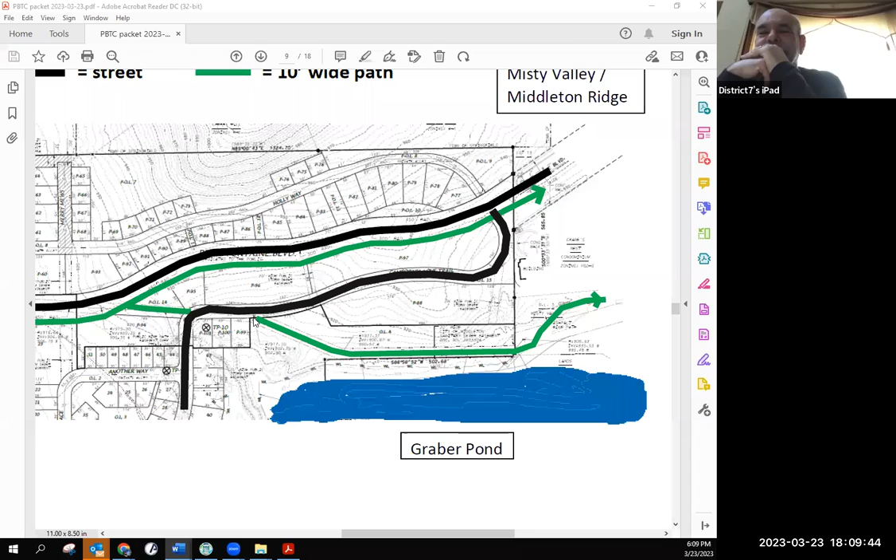Well, I wanted to run this by you to see how you felt, give you a chance to weigh in. It's better to weigh in now before there's final approval than to ask afterwards.

But I think if you're feeling strongly about recommending to the Plan Commission that the path continue, replace the sidewalk with the path for these 3 houses, then it will cross here at this curve, but having it at the midpoint of the curve, that's maybe not ideal.

I also thought about having it be right here, between the backyards of these houses, and have it cross there, but I don't remember what this land use is. I think this was a commercial land use. Can't remember what that is.

So anyway, that gets a little wonky too with coming down. Everybody kind of agrees that it's kind of strange that it just ends, jumps on a street and goes back to path.

Here's the recommendation: if the committee would prefer to see it connect, then somebody should make a motion to that effect.

This is the closest analogy I can think of in our path system, at Hidden Oak subdivision, where we have a path that replaces the sidewalk with a 10-foot path, and then it crosses on a curve, albeit not as steep. But maybe this is the best example we have in the city.

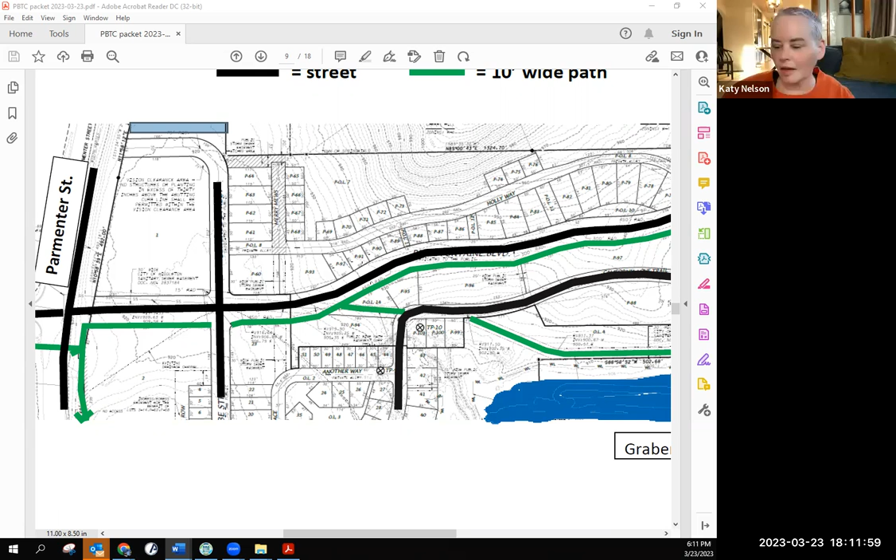Planning. Why don't you recommend to the Plan Commission, expressing the concern that there be continuity in the path. That you would prefer to see path continuity, and recommend that it take the place of the sidewalk in front of those three houses.

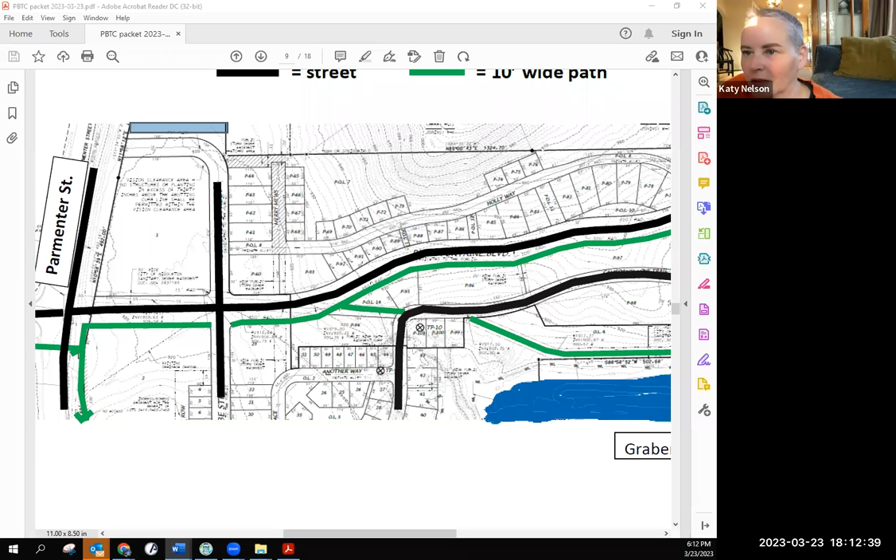On recommendation from the Bike Transit committee, we recommend to the Planning Commission that the path stay continuous and consistent throughout Belle Farm, and that the bike path take the place of sidewalks in front of the residents to keep the path consistent and safe.

Thanks, Katy. Do we have a second to that? Second, I second it. Okay, we have a motion and a second. Did you get the second, Mark? It seemed like a tie, I wasn't sure who got there first. So you tell me who you're recognizing. I heard Jim's voice, I think. Okay, yep.

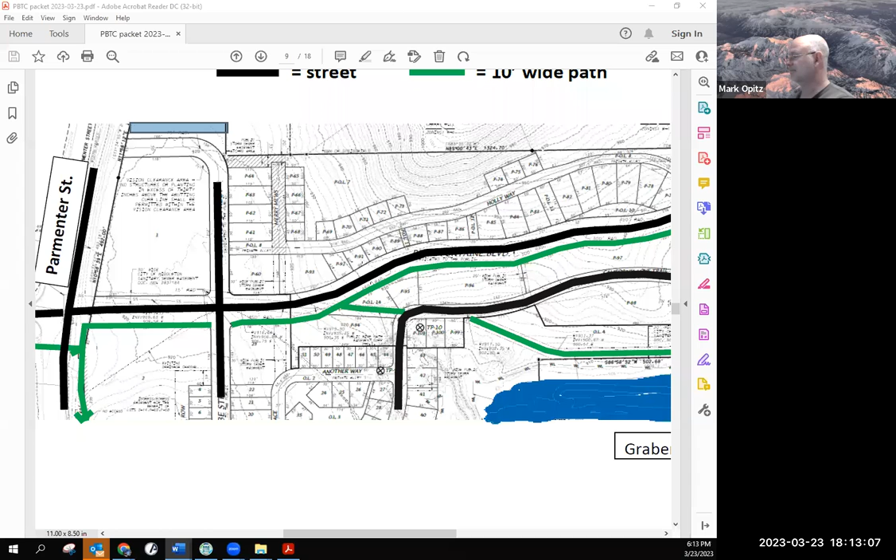All right, we have a motion and a second. Any other questions or comments? Hearing none, all those in favor of the motion signify by saying aye. Aye. Aye. Anyone opposed? Motion carries.

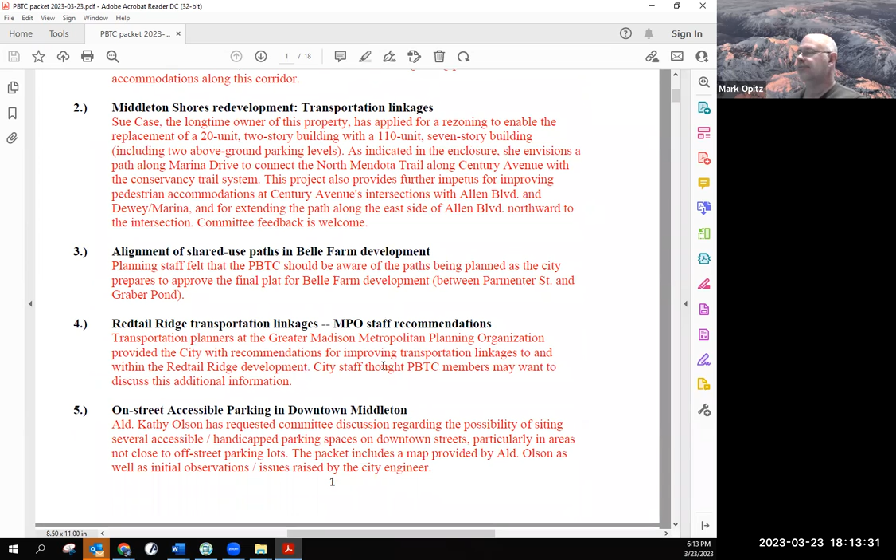Let's move on to agenda item number 4, Redtail Ridge Transportation Linkages.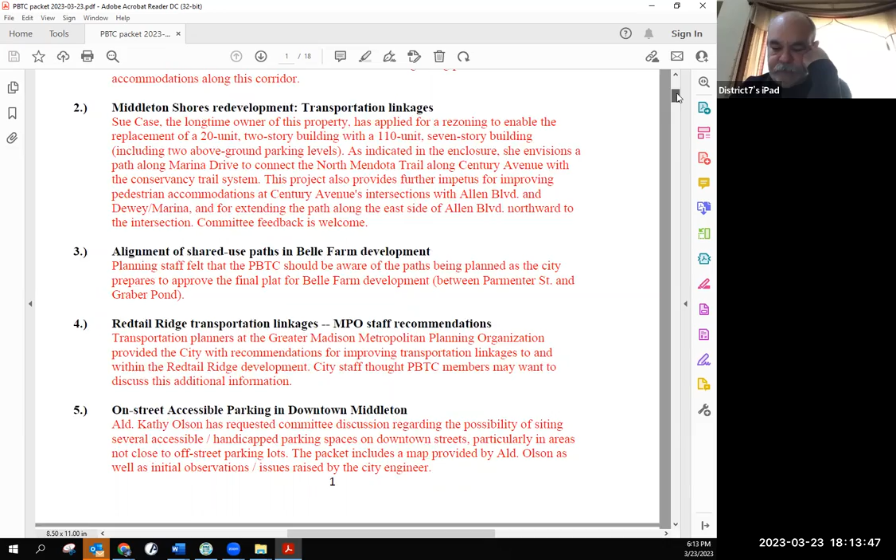So you've seen this project before, we were just alluding to it. Let me back up here - I went too far. Out of the blue, we got these comments from our friends at the Metropolitan Planning Organization, which they are trying to offer this service more frequently now, especially as it relates to urban service area amendments, which is when a community is needing to seek permission to extend sewer and water mains into an undeveloped area. So whenever those requests happen, those go to the Regional Planning Commission, and the MPO staff then weigh in as well. This was the result of them weighing in. They saw an opportunity to comment and provide specific comments on the transportation network.

So that's why, so we got this in, when was that? A month ago, very specific comments. A lot of them were already things that we had considered. I won't go through them all now. I presume, since they were in the packet, you read it, and this is my response to them.

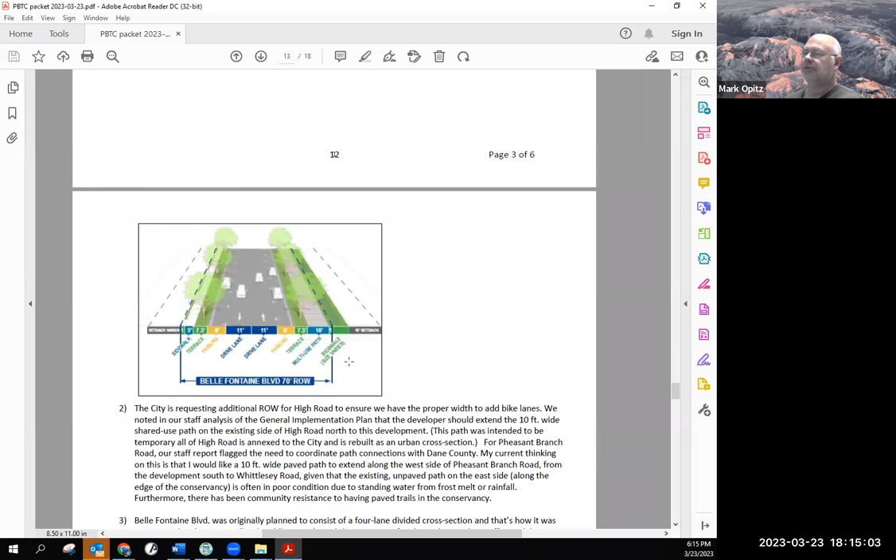So, by the way, here's the design for Belle Fontaine, showing the 10-foot path on the south side instead of the sidewalk. So I've responded to them. They don't have any oversight of this, they're just giving us this guidance and offering to help us make this a better project. I just thought I would share it with you. So happy to answer any questions you have.

Does anybody have any questions for Mark? Since they recommended it, and kind of as a reference to what became the first agenda item, are we at least going to stripe this on-street parking? There's been no discussion of that. Okay, I mean, we don't stripe on-street parking anywhere in the city, to my knowledge. I can't think of any examples anyway.

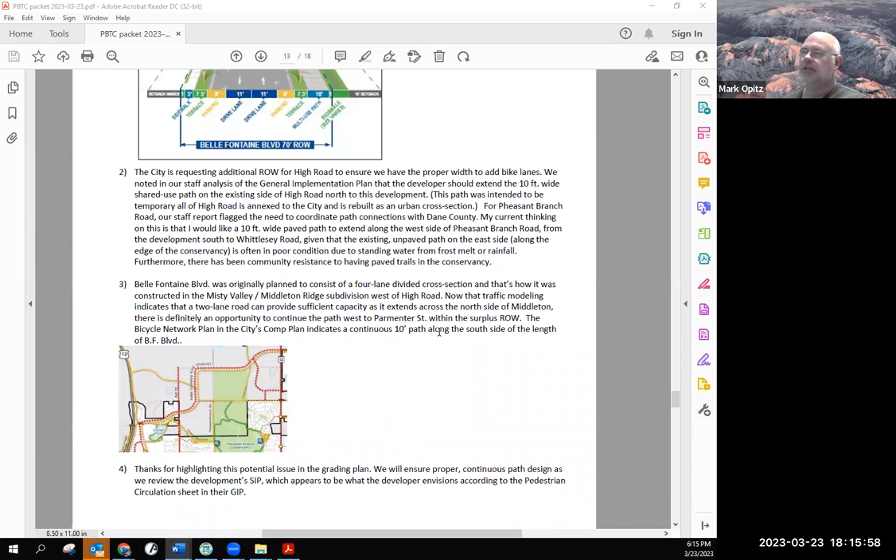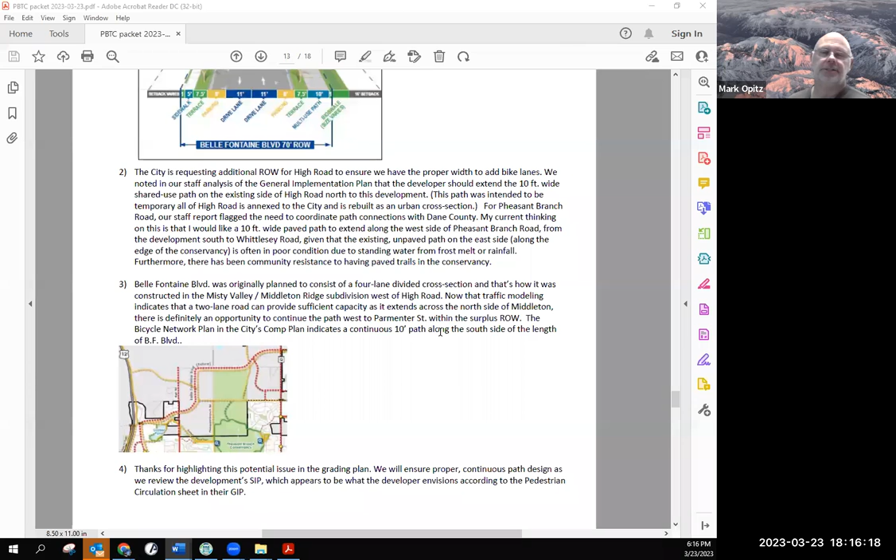Right. Maybe that's something that the committee can address - you didn't comment on that specifically when we talked about downtown. No, it was brought up, but I didn't hear any feedback on whether you want us to proceed in that direction or not. I mean, we can have that as a separate agenda item sometime too, as a policy discussion, but you're welcome to discuss it now.

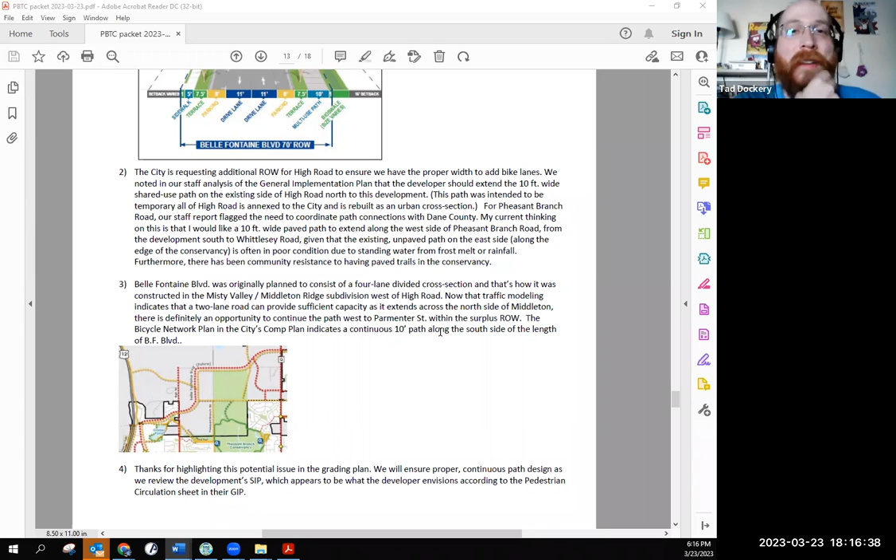Well, the rest of the committee knows how I feel about on-street parking in general. However, if we were to - one of my related contentions is that it doesn't actually do much for traffic calming unless it is occupied. If you do not stripe it and do not occupy it, then really you've just given a single car a 20-foot lane, and that's not slowing anybody down.

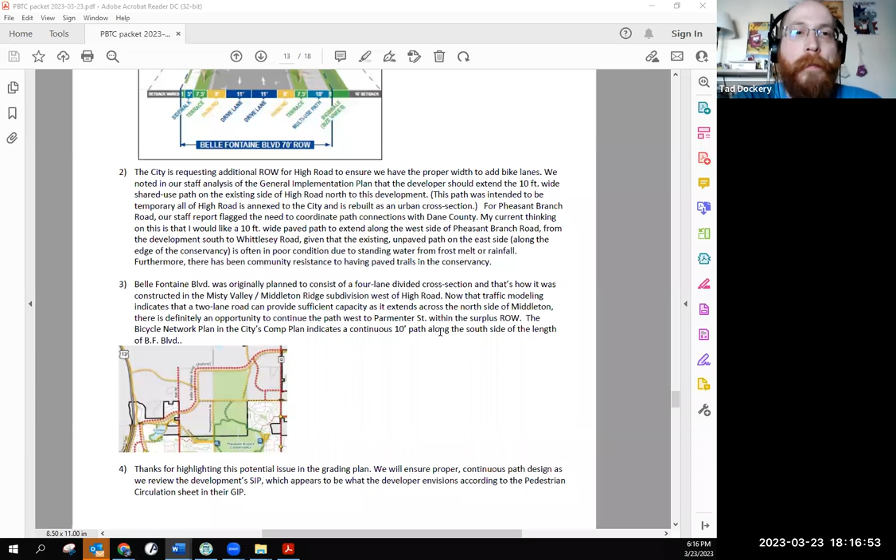So in this context, because of the previous mention, if we want to provide accessible on-street parking, it helps to actually designate the parking areas. By the same token, we would need to at least paint it. But if you want on-street parking that actually provides a traffic calming effect, whether it is occupied or not, it would be helpful to have at least parts of that parking designation be curb and gutter - an actual physical barrier that people can see and know that just because there's no car there, they can't use this area as their personal raceway.

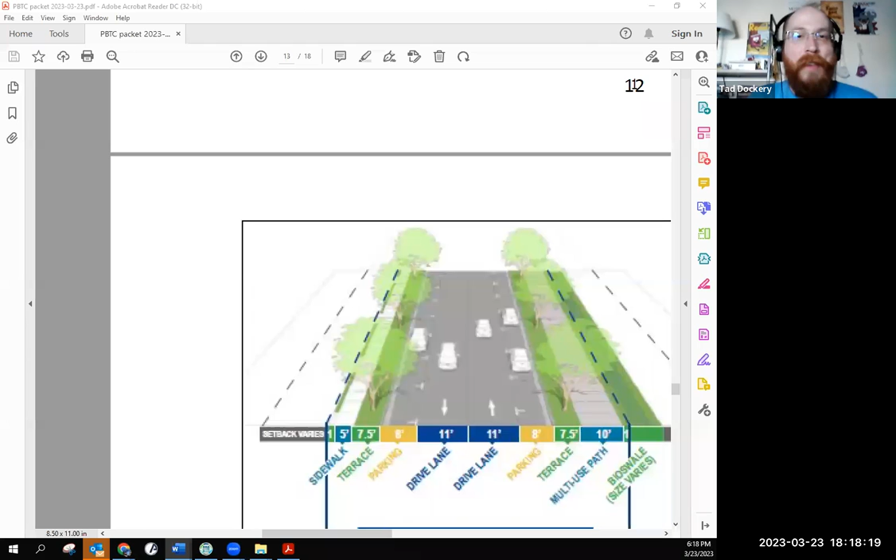It will have curb and gutter. Okay, you're designating the back of a parking area or just the side? Just the side, I'm not sure. So what I'm talking about is on-street parking as bays cut into the terrace. Oh, I see what you're saying. Because otherwise, you're just giving someone a 20-foot wide lane that might be occupied.

So you're recommending that on-street parking be set into the terraces, set as bays into the terraces. I can tell you, and I have no problem with that, but I think our plow drivers would. So what this does, Tad, is at intersections you have a narrower crosswalk, a shorter crosswalk for pedestrians. So I'm hearing that's what you're recommending as a design. That's the direction I would like to move in.

I'm sure our snow removal people may not like it, but there are other snowy cities in the US and Canada, around the world, that are dealing with the same thing and doing just fine. So if we need to learn from somebody else, we can do that. I think that's a good point.

Can you think of an example in Madison? I'm trying to think of an example where this is, so we can just see it quickly. Is there anywhere we can get a visual of what exactly he's describing? I'm just trying to think of an example in the area. I think I found one. Well, no, I didn't. I was down on Bassett Street. I'm just trying to think. Tad, can you think of an example, or can anyone think of one in the area? No, I don't drive that much lately.

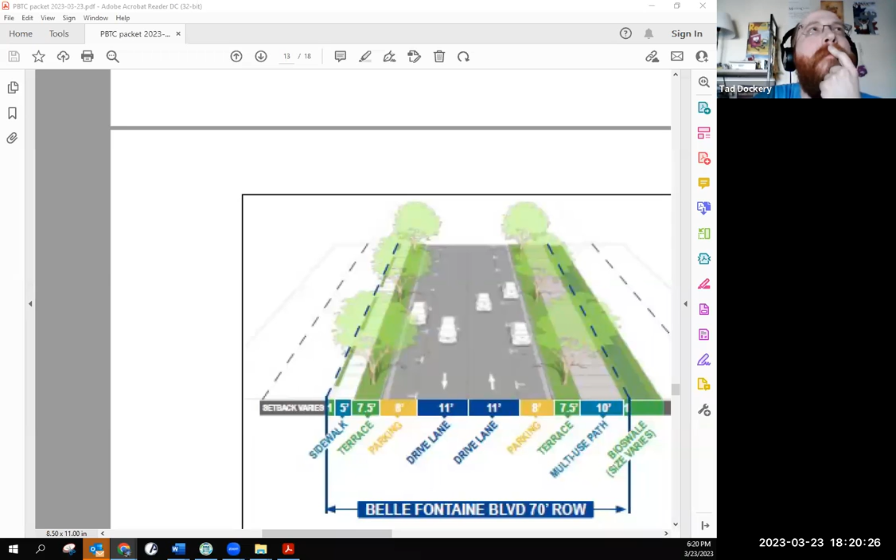I don't have one off the top of my head, but essentially what he's saying is, well, that's not quite right. Basically you'd have a curb extension, a bump out. Nate, you know the design term better than I do. You minimize the time that people spend in the crosswalk.

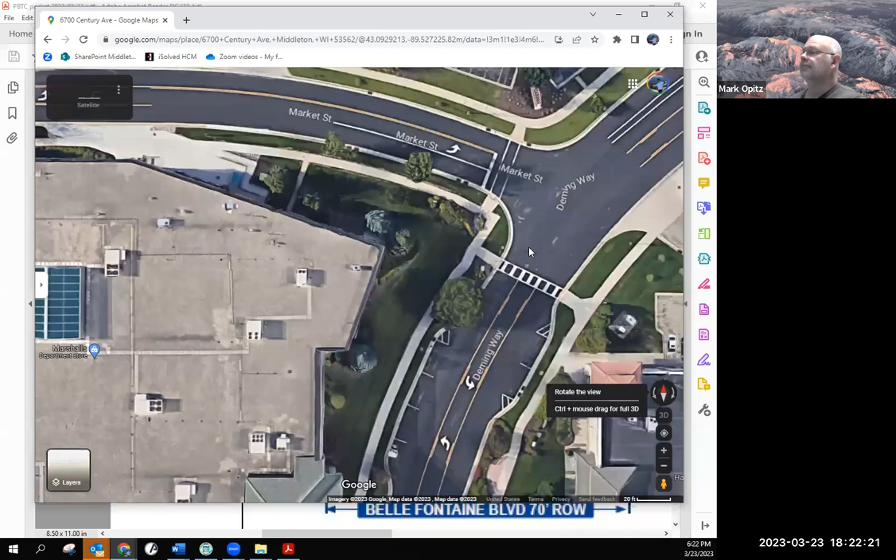So yeah, that's a good example. Okay, well, I will pass that along as a design recommendation. Well, assuming, I mean that's just one person speaking, how do others feel about that? Yeah, I'm good with passing that along as a design option. I think that's something I like the idea of, the shorter distance at the crosswalks. I like that idea.

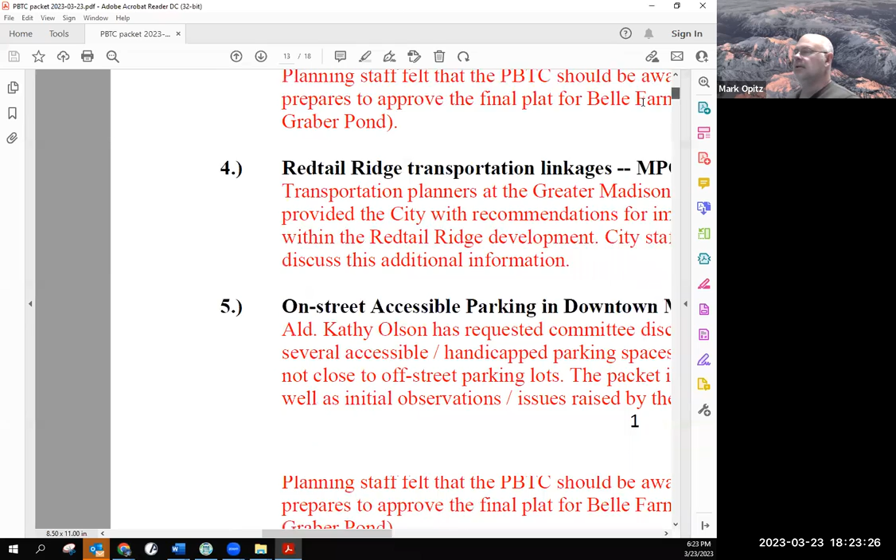Do you want the consensus of the committee to reflect that, to be incorporated into the design for the SIP, the specific implementation plan? Well, I want to hear from other committee members if they would also be in favor of that. Do you need a motion? Let me see, let's see how the agenda reads. I don't think it reads as an action item, does it? Well, yeah, I mean, I said you'd want to discuss this additional information, Redtail Ridge transportation linkages.

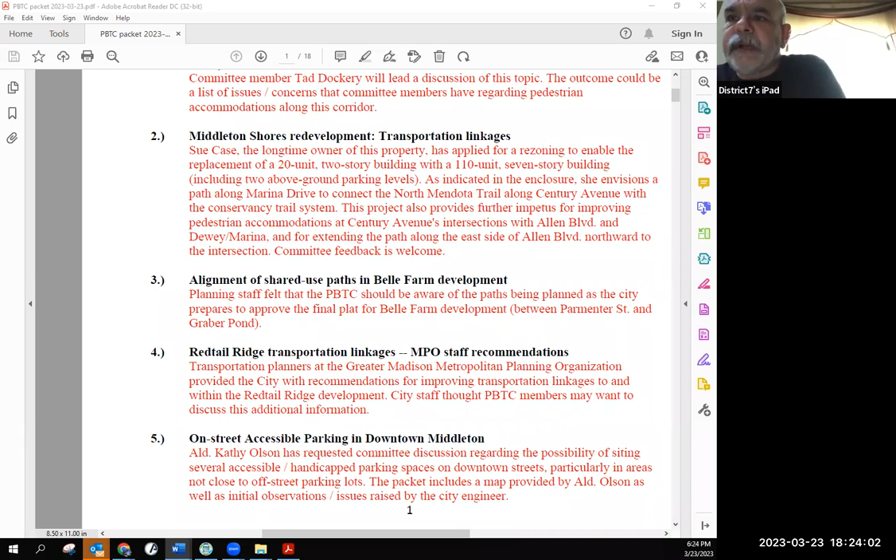If the consensus of the committee is to request staff to work with the developer to incorporate this in the design, I think that's perfectly appropriate. But I'd like to hear if anybody disagrees. How does everybody feel about that? Is everybody good with that? Hearing no objections, that would be the consensus of the committee, Mark. Okay, that works for me.

That takes us down to our last item, because we took last first: the North Mendota Trail project status.

Dan, I'll let you do the honors since you made the observation today. So I was driving back to Middleton from the east side of Madison today, and in front of the north side fire station, Sage Meadow, and Dollar General, earth is being moved. It looks like they're making the cutouts for the retaining wall, so progress has started for the spring. I'm happy to report it's not going to get done as soon as I'd have liked, but I think the latest date is June. Is that right, Mark? We're eyeing early June.

You've been talking to the mayor? No, I spent a lot of time on this, I wasn't talking to the mayor. Well, I'm just saying he made that comment too.

Any other comments? I just want to make a brief comment. Since there's not going to be an April meeting, this is our March and April meeting, and this will be my last meeting for Bike and Ped. I've enjoyed being on this committee all 6 years of my term.